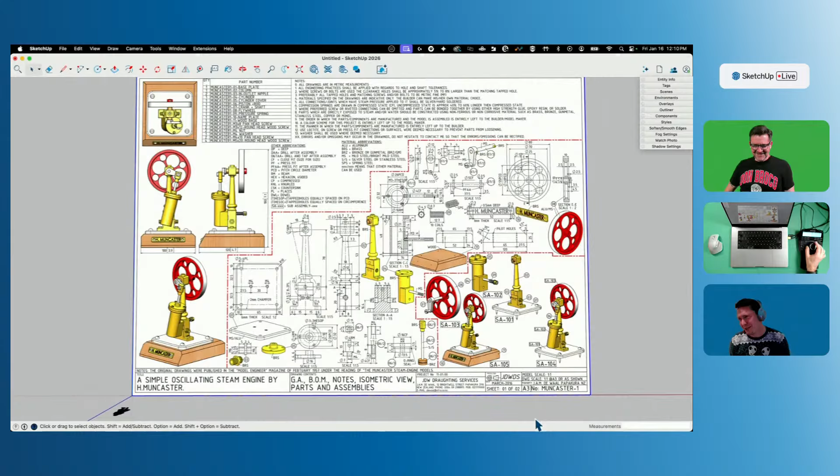Classic. Yeah, so this is the plan.

So the reason I picked this, like I said, there are a lot of these, all different style steam engines. I didn't know there were so many different ways to push steam into a piston to create movement, but I'm not kidding when I say dozens of these. Non-professional Dave can actually comment on how many he's made. I want to give him credit, though I can't remember if he built one first on the forum or if I did one first live, but we did some back and forth sharing these files for sure.

You say built, you've actually built one of these in SketchUp? Well, I have not actually made this in real life. I don't have metal machining abilities. I tried 3D printing one of these once, and the tolerances on 3D printing aren't good enough for this. Two pieces of metal can slide together fine, but two pieces of 3D print go like this instead.

So it doesn't work. The main reason I picked this one is because it has 11 pieces plus a couple screws and nuts, so we can get through this fairly simply. If we spend 10 minutes per piece, that's 100 minutes, so 110 minutes total. We should be able to do this.

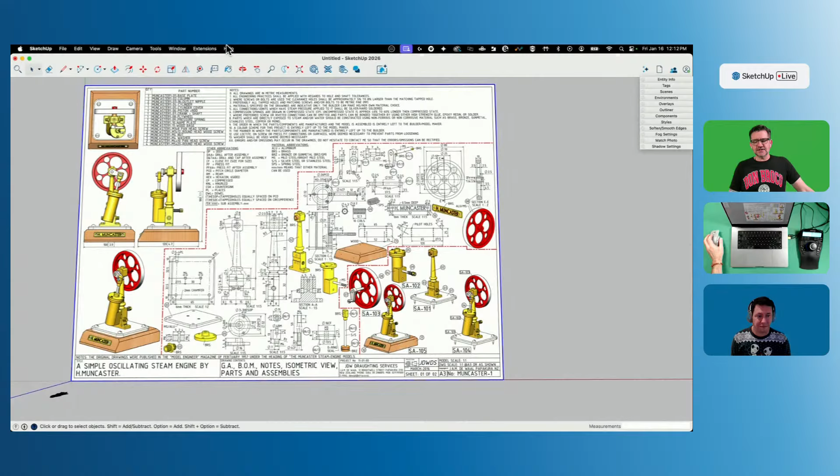When I model, SketchUp is limited. SketchUp was created to model architectural size things, house size things, office buildings, that kind of stuff. So when it comes to modeling really, really small faces, sometimes it can fall a little short. We're talking fractions of inches or fractions of millimeters. But to keep everything the same, so everything renders correctly and the geometry builds correctly, we're going to build these millimeters as if they were meters.

So we're actually going to scale this up by, was that 100 times? We're going to model all this stuff in millimeters. It'd be 1,000 times, right? 1,000 times, yeah. Okay, 0.001. Okay, so we're going to model in meters.

So the first thing I'm going to do before I go any further is go into model info. I'm going to click on units, change to decimal units, and then set it to meters. I'm not really concerned about area or volume, I'm not going to be pulling any information like that. Really all I need is my length to be input in meters by default.

All right, what we're going to do, I really want to visualize this with current materials on it. I think it's going to look really cool with some brass on there and that kind of stuff. But for the time being, I'm just going to model it without worrying about that right now, for two reasons. One, I get caught up in it and forget to continue modeling, start playing with materials. The other is if we're modeling 1,000 times bigger than the actual material, we can get some weird looking materials. It looks really good on a face this big, but shrink that same material down to about this big and it ends up looking tiled and weird. So right now I'm just going to put in basic materials, everything white. We'll make tags for everything as we go, and when I'm done, I'll scale it to the proper size, put materials on it, and look at it with all the rendering and stuff. It'll be fun.

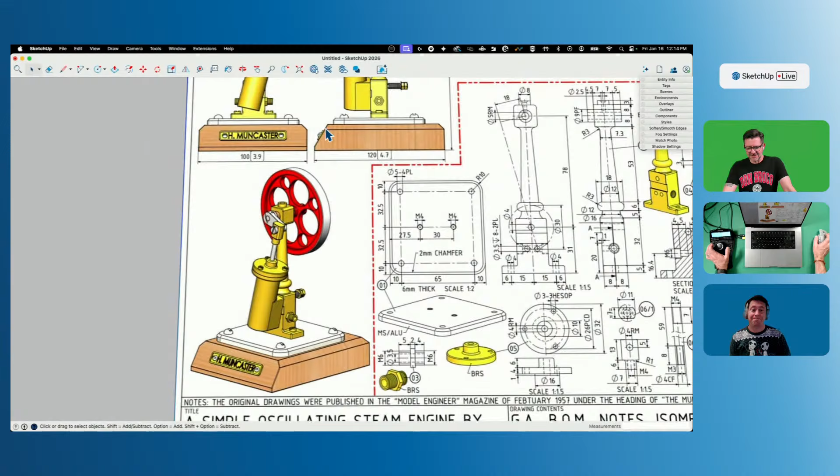I'm going to model most of this stuff using just native tools. The one extension I'm going to use is Bevel, to put some of these bevels on here—not this one I'm pointing to, but anything that's rounded off. It's just much quicker to use Bevel than to go in and do Follow Me's.

All right, let's start with piece number 1, which is this plate right here. This plate starts with math: 65, 75, 85... square. So 85 by 85.

I'm going to start on a rectangle, 85, 85. Because meters is the default unit, I don't have to type in a unit to measure in, and it'll give me an 85 by 85, which is very, very big. So I'm going to scale my instructions up so that's close to what I see here. There we go.

Now I want to turn this into this. When I look at this, it's a flat plate with the angles cut off at a 45, it looks like. It's got 1, 2, 3, 4... 6 holes in it and rounded corners. I'm going to do the rounded corners and the holes while it's one flat piece, then extrude it up and do the chamfer thing around the outside.

I usually put rounded corners on last. The reason is it's easier to pull off the edge when I have a corner right here, as opposed to having to come back at the back of an arc to pull a dimension.

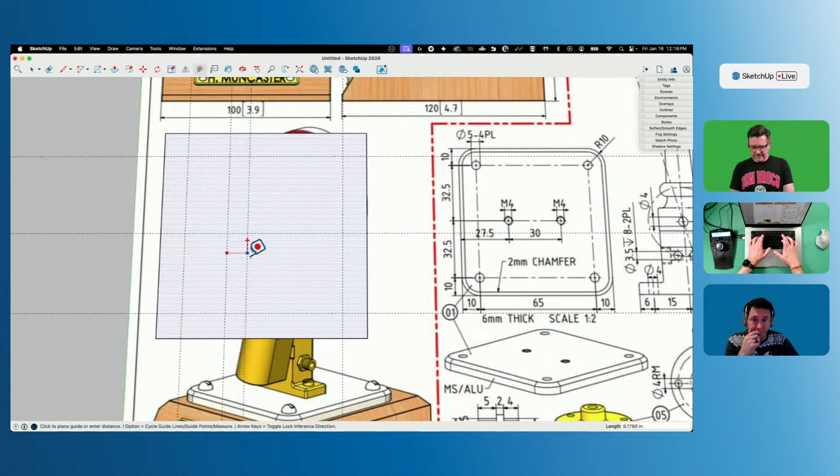For the chat: give me, if you will, the measurement I need to put in for an M4 screw hole. I believe it's a screw hole, not a through hole. So give me what an M4 should be in millimeters.

While you do that, I am going to put these in here, which...

Dave says, 'guides? I just fell off my chair.' It's a new year, man. New year, 5-4—oh, 4 of them. Transom just picked himself off the floor.

M4 equals 2 millimeter diameter—2 millimeters, okay wait, no. Somebody says 4 millimeters, nope. 2 millimeter, 2 millimeter radius—yes, not diameter, radius. No, 2 millimeter is a 4. Nope. Now Dave is saying M4 drill tap is 3.3 millimeters. We've got numbers all over the place—4 millimeters, 3.3 millimeters. I believe 3.3 is it. We're going to go with 3.3. Okay, I wrote it down in ink on a piece of paper. We've got to use it.

Okay, I got those in so I can get rid of some of these guides. Whoops, too much. I do delete my guides as I go—I don't like a bunch of guides in my way. So I'm going to keep my outside ones here.

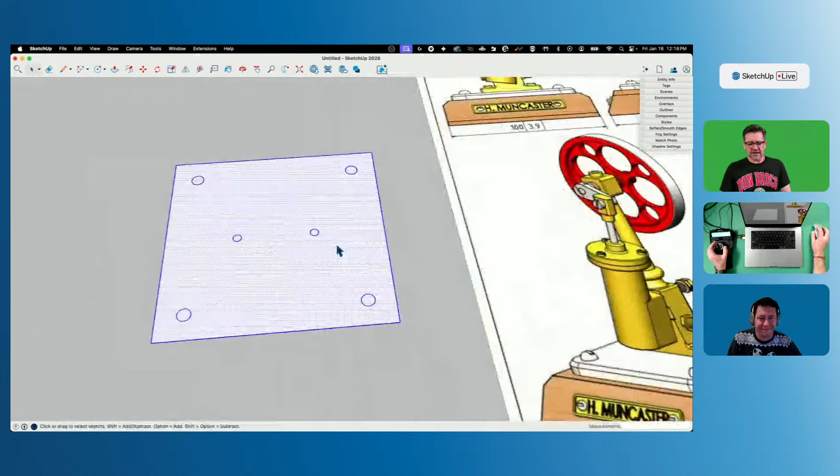Now here's the thing that happens sometimes, so I'm going to explain it—explaining this is going to take longer than the time saving that's actually going to come from doing this. The reason I'm doing this now is so when I pull this up, the holes will already be there. If I waited, if I pulled first then drew the circles on top, I'd have to pull each of them down, which isn't so bad with 6, but imagine there were like 150 holes here.

One of the other things that happens when you do this is now I have to go through pick and delete, pick and delete, repeatedly. That's how long it would take to get rid of those faces. With 6 it's not terrible, but imagine this was a shower drain with 99 holes. So I've started playing with select and deselect tools. If I select inside the square, I can get all of those selected. If I hit delete right now, they'll all go away, but I don't want that. Instead, if I select all of these, right click and say select only faces, I can quickly get rid of that. Now this is ready to pull in.

Wow, so something to try - there are some select filters. Some of them I have are selection toys, but there's a native filter as well for selecting and deselecting specific items.

I need to put a 10-meter radius here, so I'm going to draw a line back 10, then grab an arc, go from here to here, double click, double click, double click, and get rid of that. That is now ready to be pulled to depth, 6 millimeters thick, and pull it up 6.

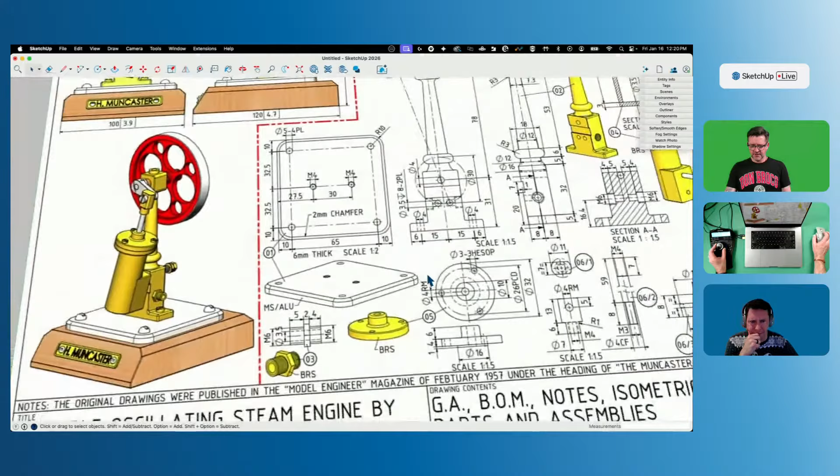Now one last piece here is this little 45 right here. If we have a dimension anywhere, how do you know it's a 45? Just based on this rendering, it looks like it's not rounded over. Does it say 45 anywhere? No, okay, but I'm totally assuming. Oh, here we go, this is perfect, see look at that, it's definitely not rounded over. So what I don't have here is a dimension to it. Oh, there it is, 2 millimeter chamfer.

So what I'm going to do is double click, then F for offset, pull this in 2. Beauty. Now what I need to do is get the outside and push it down.

This is kind of a bummer because this is not going to be easy - I'd have to go select all 8 pieces. Instead of doing that, I'm going to undo a couple times and go back to flat. I'll double click, right click, weld edges, and that should give me one piece all the way around. Now when I push this up, a couple things happen - when I go up 6, I don't get the little edges at the end of the arcs that I saw before.

The other thing is this is all one piece, so when I offset this 2, I can grab this with a move and drop it down vertically 2, and there we go, that piece is done. That piece is cut out of, looks like aluminum. Yes, so here's what I'm going to do.

I'm going to triple click, make this a component. I want to make it a component because I want to give it a name. The name is going to be 01 base plate. And I want to assign a material.

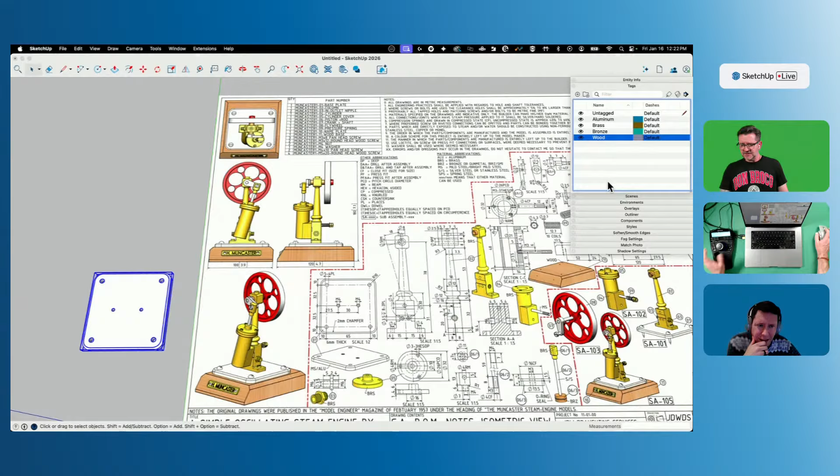Would the red thing be like cast iron or something like that? Or I think the red is just - I believe this piece 7 is actually cut out of aluminum, just painted red. So we'll have to decide if we want to paint it red or just shiny aluminum. Of course shiny is going to look good when we do materials.

Fair enough. So one thing I'm going to do is color everything on the layers by tags. To do that, I'm going to change my default color. So for aluminum, we'll change that over here, grab just a default color of like a light silver. Brass, we'll use like a yellow. Bronze, we'll use an orange.

And then for wood, we'll just grab a brown.

All right, then what I can do is take this piece right here. We're going to apply that from the untagged. We're just going to say that is going to be made out of aluminum. And then the other thing I want to do is, I forget how to color by tag.

Hold up, that button? There it is. Color by tag. So we won't get our full shiny reflective material with material mats or reflection maps or anything like that, but we will get a color indicating what it's going to be. Like I said, once I scale it, then I'll put the proper piece on there.

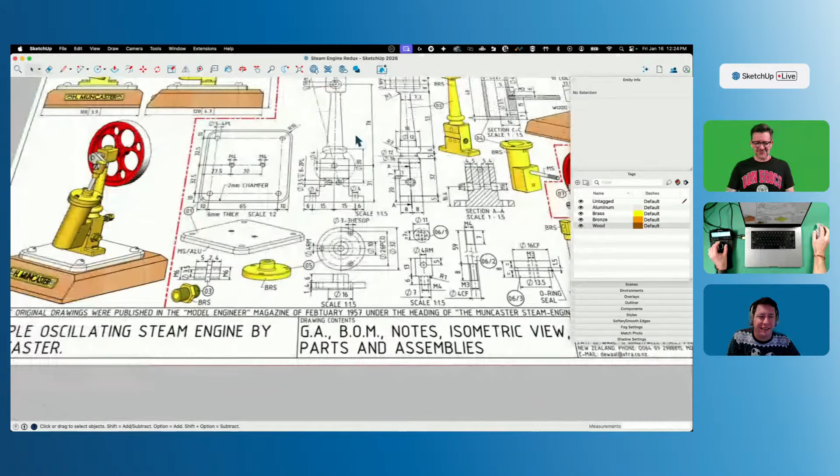I said that like there have been, I just read that right here. Yeah, there have been comments that there is a whole lot of text on these plans. There's lots of words. I generally, when something like this, the most important thing to do first is ignore all this and look for pictures. So that's exactly what I did.

All right, moving on. We have this big old brass piece, and it's 2 main pieces. So down here we have like the base of it, and then we have this kind of spindle with a block at the top. So I guess 3 pieces, 1, 2, 3.

So let's start, let's just build up. So we'll start with the bottom section. Here we have a beautiful section right through the middle. This is going to make it very easy.

The tricky thing too about these drawings is, like I said, if you go look for them, you will see a bunch of them, and 95% of dimensions are great. Every once in a while, it makes you work for a dimension though. So that could happen. So let's draw this thing.

Dave is reminding that it's now a good time to save. Save, right. So 30 plus 12 is 42.

So this is 42 wide. This little foot thing comes up 5. Comes over an amount that I don't know. All right, that's cool, I'm just going to go ahead and create this rectangle.

This is the base right here. And then from there, let's see, it goes up to here. So that's 32 above the 5. So it could come here and type 32. That gets me trying to show this and also,

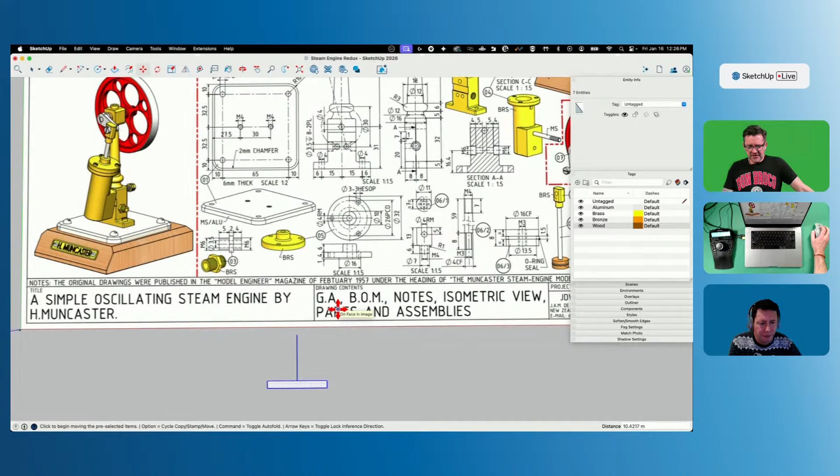Jason said, is there a database to download different technical drawings for bigger assemblies of these? I don't know, I think these used to be on a website. I don't know if they still are anymore. Dave may actually, if Dave is still here, he may know if the database is still there or not. I don't remember, or I didn't go look at it. I just grabbed this simple one.

Let's see here, where are we at? So that 32 is to right here. Trying to find a width of this overall piece. Not seeing a whole lot. Let me look at something.

Gusbert saying those M6 holes are 5mm diameter before tapping. M6 is 5. All right, perfect.

Okay, so it's not the same width as that block at the top. Keep looking, keep looking, keep looking. 18, not the same. Oh, right here, 8 and 8. That's what we call 16.

All right, so I'm going to go this way, 8, come down. Go this way, 8, come down. That doesn't look right at all. 16. That's the width the other way.

Which is good to know. I had to pull that up 8 at some point, but this piece right here is wider than that. Oh, it really doesn't say, does it?

It does, and this is what I was saying. This becomes the challenge of these models in particular. It's not always everything you need is right where you need it. Sometimes you gotta look around, or it'll inference hole locations from another entity or something like that.

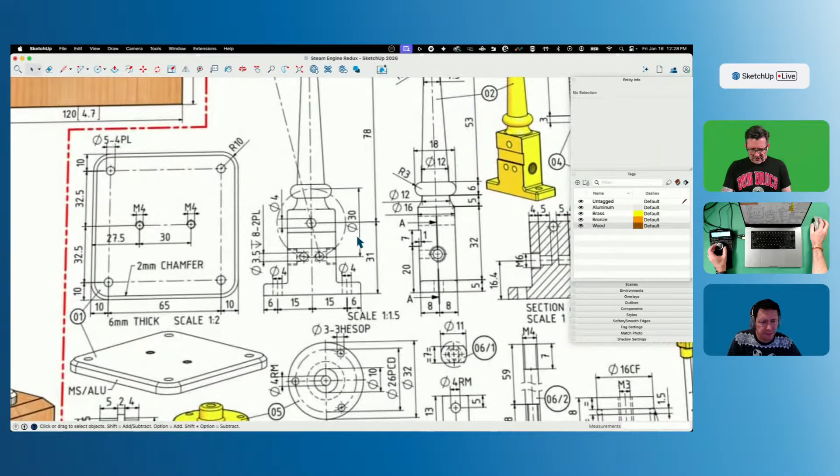So we got 15 to the middle to this screw hole, which is good to know. But 15 here, so it comes over this way, 6, and then it goes back in here some additional amount, another 4, so leaves this at

22, maybe. Let's see what this looks like if I go from here over 11. All right, so that's a total of 22. Over here we got 10 and 10.

That seems right, that's what I'm going with because I don't have any better number. So let's take a look at that section to the right. Yeah, it shows the height of the holes, it shows where the middle hole is, and it shows the depth of the holes on the side, but it leaves me guessing right here at the middle.

So it's 9 plus 9, which is 18, plus slightly smaller than whatever this hole is, so 9 from 9 is 18 is 22. So actually, if that lined up perfectly, then that would be 22. We're going with it, nobody talk about that ever again. I'm not going back, I'm not changing it, we're moving on. This is 16 deep.

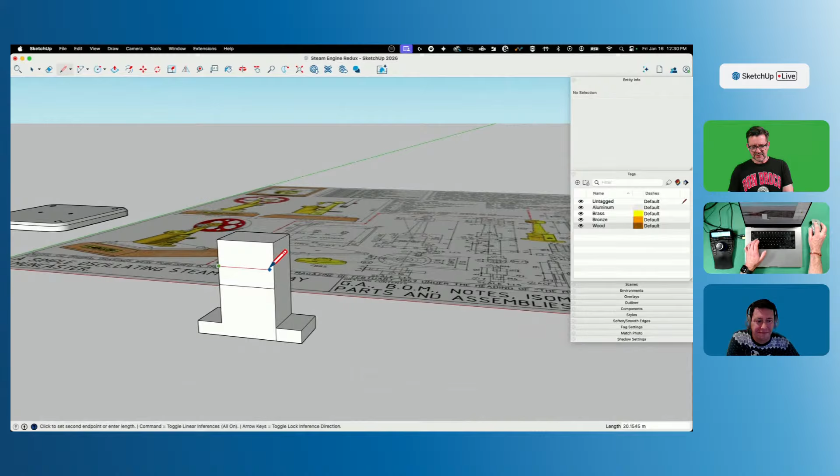So last time it took 3 hours, 4 hours. How long did it take? But I don't remember, you'd have to go look. It was 3 years ago, but I don't remember exactly what the time was, just because we jumped around for a little while there with how long a stream was okay to be.

So this is a 1 millimeter inset, so I'm just going to put in 1.

We got some people that just joined wanting to know, what are you doing? This. Probably not good enough - we are modeling a scale steam engine, so we're modeling each of the pieces. We've got 1 done so far. Also talked a lot. So, all right, I'm gonna finish throwing some holes in here.

So on the side here, I have an M6, which is an untapped hole of 5 millimeters, 16.4 off the ground. So if I come right here, let's do this - I'm not sure how to do that, I'll just start right here, in from straight down, 16.4, enter. And that is right there, 16.4.

I'm just gonna draw an edge across like that. The reason is I could have pulled a guide up from here and just subtracted 5 off of it - I could have done that math, but I didn't. All right, and then a hole of 5 right here.

So I'm gonna go to the middle, 2.5. Get rid of that, get rid of that, get rid of that. And then I'm gonna take that and mirror it. I'm gonna be doing this a lot across here to the other side so that I have a hole on both sides. Now, this hole goes in 4, then it shrinks down to a smaller hole on the inside.

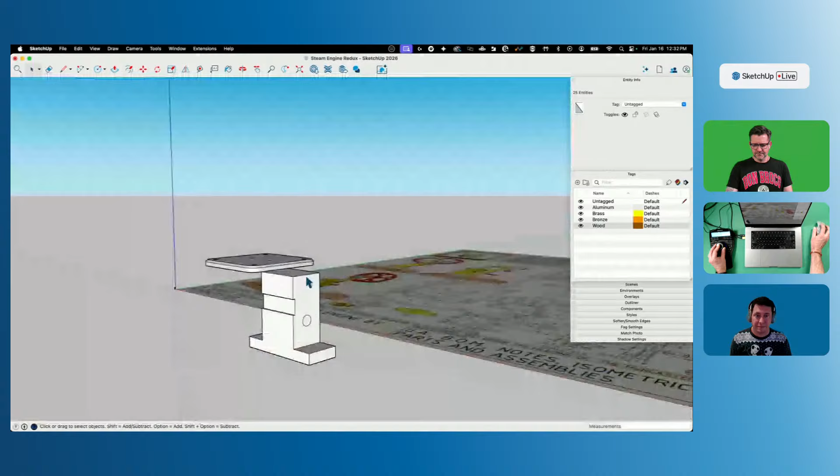And I'm just wondering, there's my 3.5. So I'm going to push that in 4. 4, enter, double click over here, and I'll zoom in here. I'll draw a new circle. At the center, half of 3.5 is 1.75, enter. I'll do the same thing.

I'll grab that, mirror it, a copy of it to the middle here. Then we should have one over here. Perfect. Then that hole goes in 5. So we'll push that, 5, and then I'll come around this side, double click. If we hit X, we should be able to see those two meeting.

I'm gonna save that because that's how I'm gonna celebrate. Anytime we do something right, I'm gonna hit save to celebrate.

Yeah, save to celebrate. Colin says the steam engine from 2 years ago was 2 hours and 15 minutes. The older steam engine model 6 years ago, for example, were longer, about 3 hours and 50 minutes. Which model was that? Was that this one, Colin?

All right, here I have 3.5 millimeter holes also. It looks like they line up right with the ends of this, so I know that's 9 in. So what I'm gonna do is create some guides.

No one expected me to do that. You're just gonna throw everybody off. All these guides, right, Aaron using all these guides. Pull a guide up to new year, new Aaron.

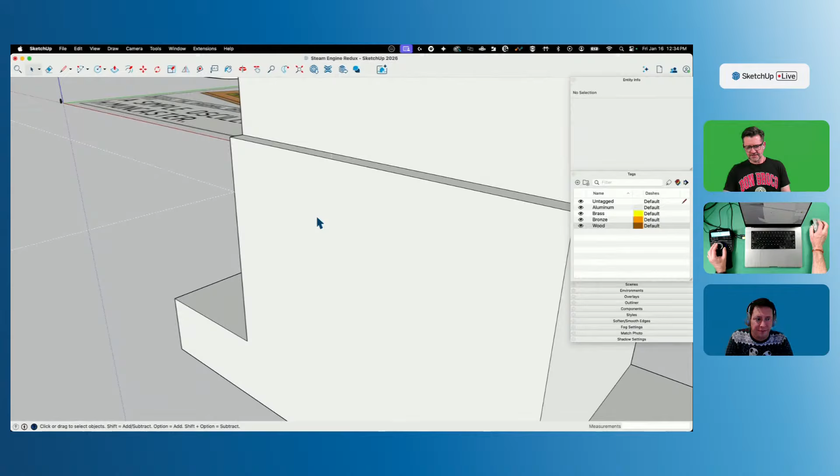I'm going to draw a line from here, 1.75, and then draw a circle from there back to here. That's going to give me my 3.5-inch circle. Get rid of these guides.

Take that again, some more mirroring, just using the center point here. There's both of them. Now when I push this in, I'm not sure how clean this is going to be. Let's see—yeah, that's not going to be ideal.

I don't love that, so instead I'm going to grab both these circles and make a group out of them. Now when I go into that group, I can push-pull this and just kind of infer where the back of that inside circle is. We'll do the same to this one.

So what I just created—if I come in here, look, component edit, hide the rest of my model—I just created these two cylinders, right? But they're a solid group. If I triple click this, make it a group, also solid, I can take this one and say tools, subtract that from this one, and then I should get my two overlapping holes.

There we go. All right, so that gives me these two holes going into this, and then the only other thing I have is one hole that goes straight through, all the way through, right there.

That is right here, which is 30 up from the—or wait, no, wait, what? 31 up. Wait, what? I did something else wrong. Maybe 31 off the bottom. Let's try it, let's see.

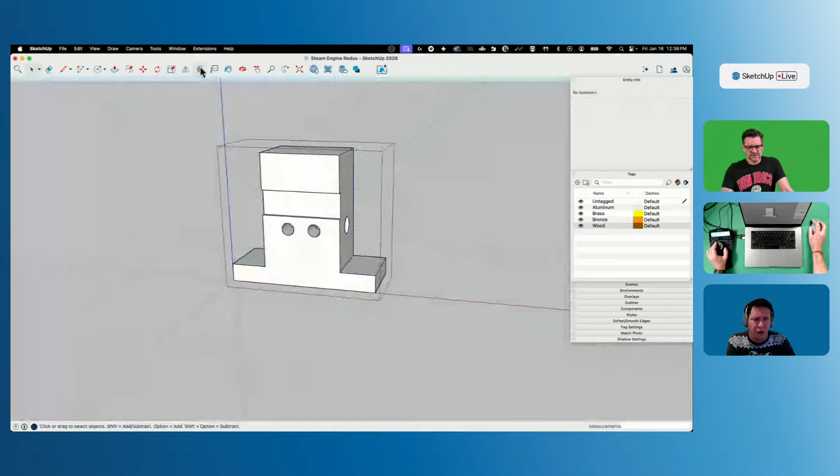Relly on LinkedIn says you can convert that PDF file in AutoCAD, rescale it, and then save it. Then you can import it into SketchUp, and with that you can easily create the models faster. So that is a theory.

Here's my one argument to that: using these lines as correct is an assumption. So if I were doing this for any kind of production where I had to be perfect, I would end up double checking almost everything to make sure it was right, which I don't know would be quicker. I honestly don't know.

Because that also depends on what you're used to, right? Yeah, yeah.

But yeah, if you can get a vector-based drawing of things that you can then import, that's definitely a nice way to go if you know you can trust it. That is a smart way to do it if you can, for sure.

Absolutely. All right, I'm going to try to draw this one over here. I'm going to draw a little line of 8, and then come up here—come up 5. I'll draw a little line across like that just to reference where that is. I'm going to come up 6, same thing, draw a little line across. I'm just drawing this profile over here.

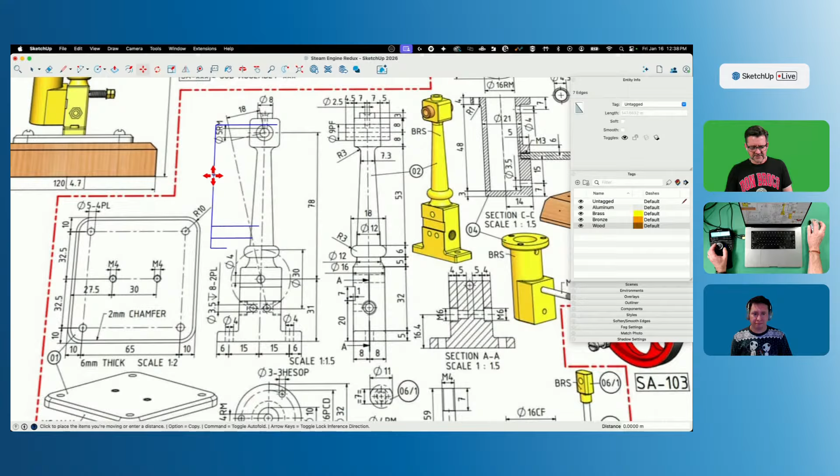Where can I stick this? That'll work okay. All right, now I can see that—okay, so first thing that happens is this is 8, that's my width there. And that's going to come into 12, so that's 6. I'm going to come over this way, 6.

And then from 6, I'm going to draw an arc that goes from here to here. I'm going to be a little artsy with this—this is not structural, so I'm going to do that.

All right, then here this line goes out to 18, half of which is 9. I'm drawing half of the profile of this shape. So that's right there. Now that has a half circle on it.

So I'm going to draw a circle right here. I'm going to chop it in half. I'm going to take this half and move it to right here, get rid of the stuff on the inside. That gives me that.

Now I come over here, 6, which is half of 12, which is the base here. That's going to go to here. And I'm going to temporarily just draw it straight up like that.

And then at some point it has a neck width of 7.3 somewhere, so I'm going to say that's here. Half of 7.3 is 3.5... 3.65.

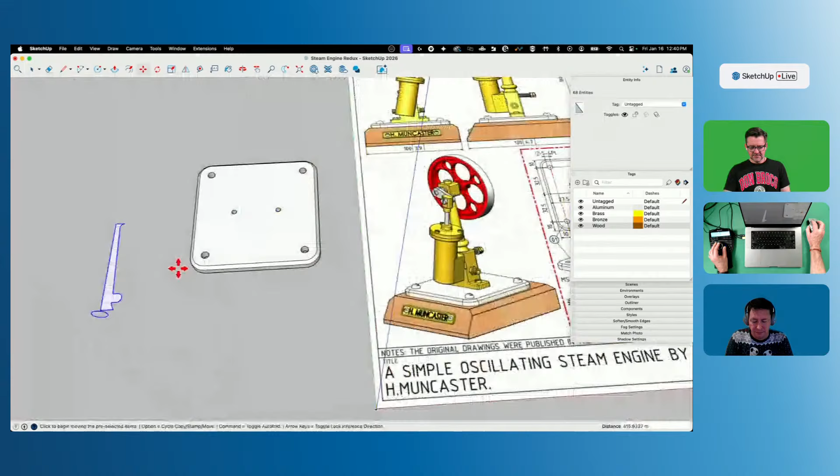All right, so I'm going to grab all of this and all of this and just slide over here so I can see exactly what happens now. I'm going to take this round piece and say, follow me with this piece. I'm going to get that.

All right, I'm going to grab that, temporarily group it, turn it upright. And now I need to put it, grab by that front piece, come right here, drop that right in the middle. That should line up front and back. Perfect, all right, there we go.

That's that piece. Moving on, we have one more, a square piece right here.

This is where I'm like, come on man, just give me a number. Why can't you just give me a number? So I know how high it is. I know it's 8 high, or 16 high, but I don't have a measurement this way. I'm going to assume that it's a square, so let's do a rectangle 16 by 16.

Yeah, looks pretty close. Wow, yeah, that is pretty close. And then we'll round the corners off at an unknown amount. Maybe 2, let's try 2, let's see how 2 looks. 2, arc, here down to here, get that magenta-y. There we go.

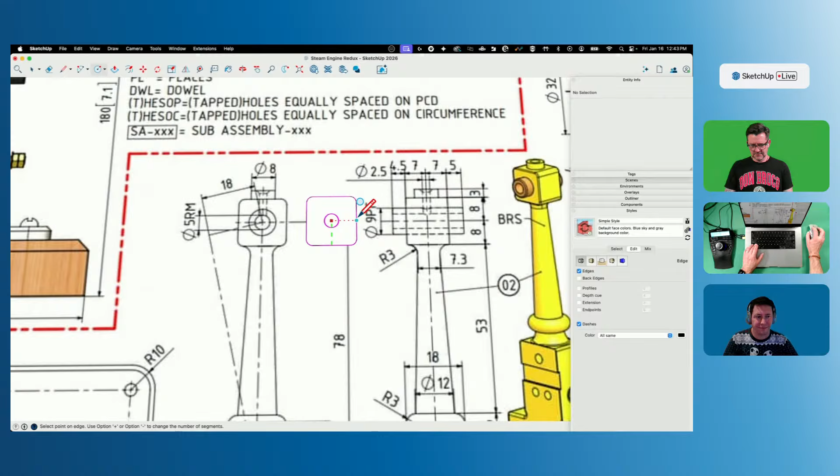Yep, all right, so I got to put a hole in there of 9. So I'm going to go to the center, inference up here, inference here, pull those two together. And then 4.5 for radius.

I'll cut that out, delete, and then make that whole thing 7 plus 7 is 14. Oop, I'm gonna weld again. 14. And then...

Got a hole in the top. The hole in the top is 2.5. All right, it's also in the middle, so I'm just going to draw a line right here, inference the middle. Right here, half of 2.5 is 1.25. Erase that, erase that. Whoa, that got kind of weird.

All right, we're good. I'm not going to do a bunch of intersecting like I did before. Instead, I'm just going to run that circle through from the top, grab all of this, right click, intersect face with model, and then I'll just erase this piece off the bottom and delete that. That gives me a hole.

Now I need to make this little—I don't know, we call it a nipple or what—but it does pop up there, outer of 8. So I'm going to go another circle. Oops. Circle, inference over the edge here, go to the middle. And then we can just—whoa.

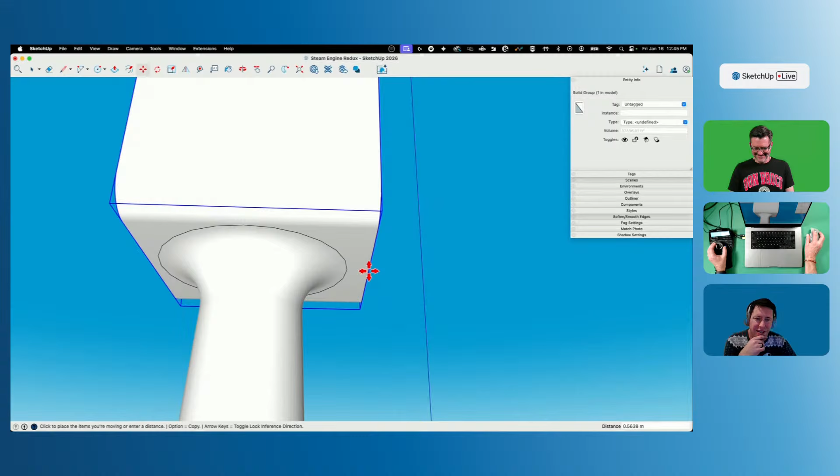Too true, too true. Especially if you're up on the 3rd or 4th floor or working on the roof, don't step back to admire stuff. I promise you that won't go well.

So then we have a tube here that comes out 4.5 on the side with a divot and 5 on the other side. The inside hole of that is... what the heck is this? I don't know what that is.

Inside is 5. So I'm gonna put a circle right here, inferencing off of this circle. I'll hover right here, go to the middle. Oh, maybe I don't have the middle here, from the back maybe? This is a push-pull, so I might not have a good circle to inference off. I'm gonna draw a line across here, put a circle. Oh, it's inside the group, that's probably why. There we go.

And then draw another one of 2.5, that gives me my 5. I'm gonna take that through to here, that's gonna come out another 5 on the back. Let's come out the front, 4.5.

And then I'm gonna triple click and make that a new group. Now I have this solid group and this solid group. I'm gonna grab all 3 of those, go to tools, and just outer shell that whole thing.

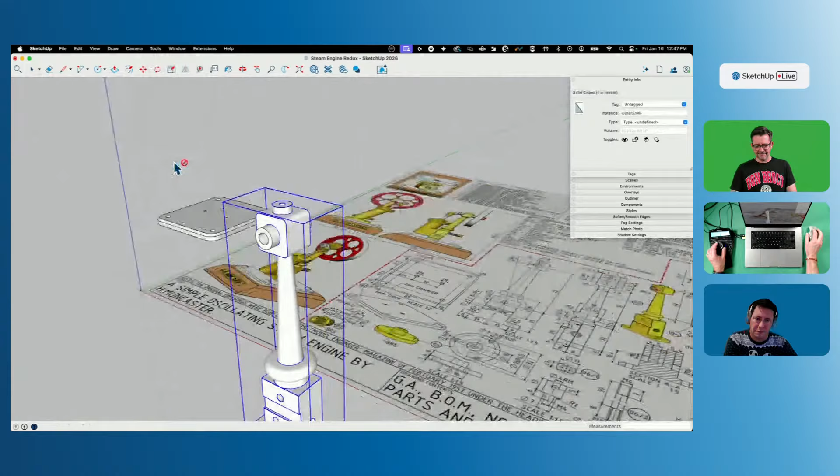Bam, that's that. Then I'm gonna grab that piece plus this piece and put that all into a separate component. Before I do that though, I'm gonna grab this piece because it's a different material - this is actually bronze - and assign it to the bronze tag first. So that should change color. There we go. Now I'm gonna grab both of these.

I'm gonna say make component, and this is 02 dash - what is the name of this thing? Column.

Dave says that is a guide to show where those 2 holes need to be to admit and exhaust steam. Did I read that right? I see, so that is a guide to show where the 2 holes need to be to admit and exhaust steam. Okay, right. Would that be this angle right here, the maximum angle?

Oh yeah, that must be what he's referring to, because that is tied off of this point right here. Kiggy says you need holes in the base plate of that piece. Right, you are. So I need some 4mm holes, 6 in. Fortunately, you can still do that.

So I'm gonna come right here - oh, gotta double click because I am in too deep. I'm gonna come this way, 6, draw a circle, 2. I'm gonna say copy that. Oops. Copy the midpoint, there we go. And I'll just pull those down, double click. Cool.

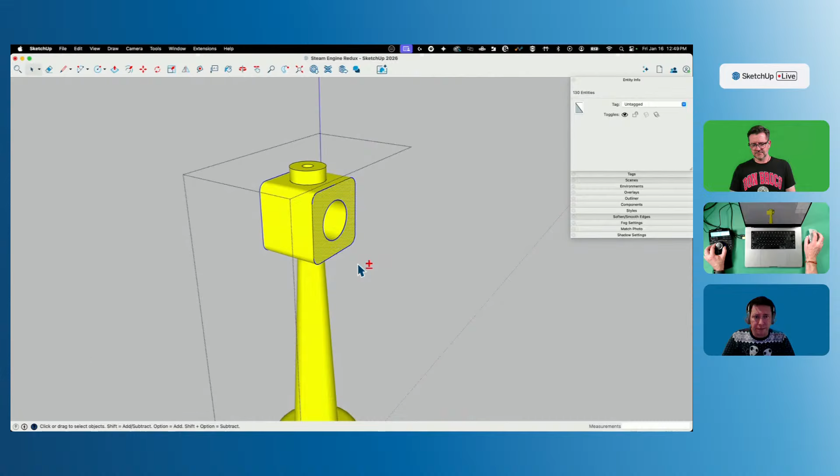Alright, so we do have a little bit of beveling happening on here. If I come into this one and grab this, that broke in a weird way. And this, even weirder break. What the heck? Okay, let's do this. Still didn't - oh right, grab that, grab that, and then I'm going to deselect.

Whoops. You okay? If I double click that, double click that, and then I deselect that, and deselect that, and double deselect the inside, now I have just those 2 outside edges. While they're highlighted, I might as well just go say weld edges. And then I can come into extension and bevel that.

I'm just going to put a 1. Let's do like a 0.5 with 3 segments. 0.5 comma 3, there we go. That's what I want. When you say 3 segments, what do you mean by 3 segments?

So if I look at my geometry here, my keyboard shortcut for show geometry is not working. Well, it only gave me 2 - must be too small. It was supposed to be 0.5 with a 3 segment arc right here, but okay, that'll still work. That same thing is on everything here down, and then these 2 up here. So I can come in here, select that, select this, this, and this. Come on, there we go.

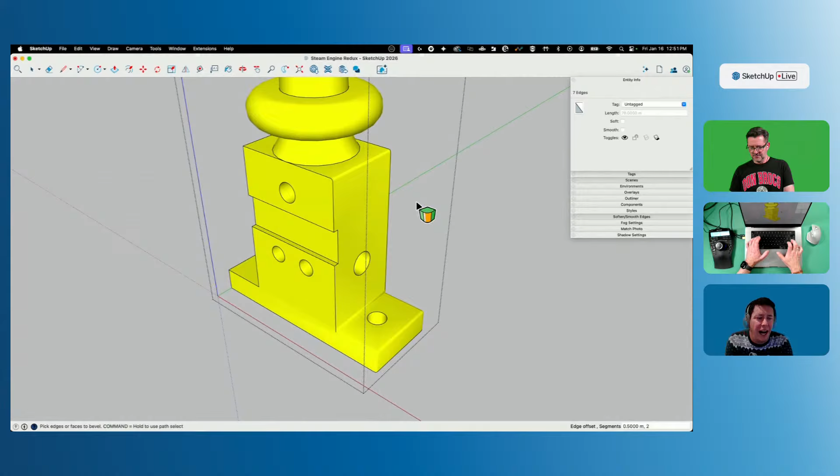People are talking about your space mouse, saying they love how smooth it navigates. I've heard it takes a while to learn how to use it, and I can attest to that, because the first time I tried to learn how to use a space mouse, I almost threw it across the room because it was so frustrating. But if you're used to it, yeah, it does make orbiting look spectacular.

All right, now I'm going to jump ahead a little bit, and I'm just going to slap this down where it goes on the base plate. So I'm going to grab this by the center of this circle right here, and place that right over... there we are. Over the center of this circle right here.

Why are they different diameters? Because this hole is one my screw should go freely through, and then this one should be threaded. So this is a through hole. Somebody who's smarter than me, tell me what the names of these holes are. So this will be threaded, and then the screw will just go through this. The head will grab this and pull it down tight into the thread there. So this piece won't be threaded.

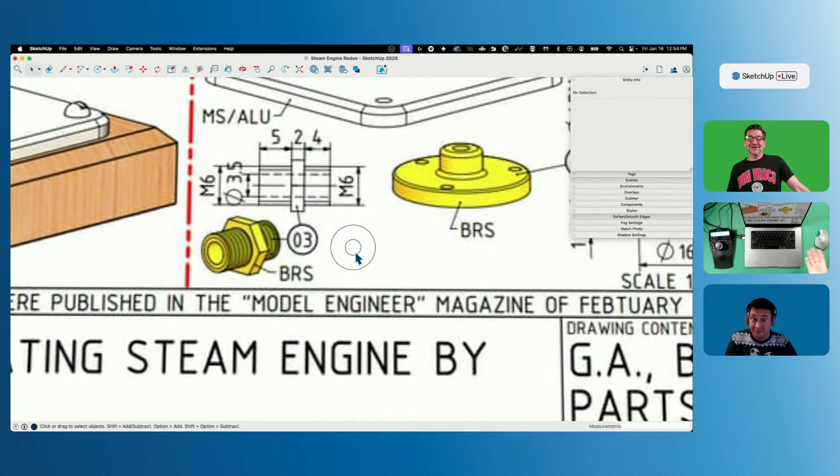I'm just going to draw this. We said an M6 is 5, so I'm going to make that 5, and then it has a 3.5 hole in the middle. So I'm going to say 1.75, which is half of 3.5. I should point out I'm not doing that math myself. I'm not good at math, but 3.5 happens to be a 2x4, and I know the center point of a 2x4 is 1.75 inches. So I don't want to disillusion anybody. All right, so we'll make that whole thing 5 plus 4 is 9 plus 2 is 11. So I'm going to come to 11. That didn't seem right. There we go.

And then separate from that, we are going to draw this, which I have no dimension for. So, slightly bigger, so I'm close. This is saying it's about 11. Let's see, if I go to my polygon, draw a 6-sided polygon, I'll inference right off the middle here, and start pulling it out to see where 11 would be 5.5. That's not big enough, maybe 6.5, no, we probably should go out all the way to 7. There we go. And then I will push that down to 7, and drop this down another 5.

That gives us this. So now I'm going to make that into a new component, which is 03, which is, of course, an outlet nipple, in-dash outlet.

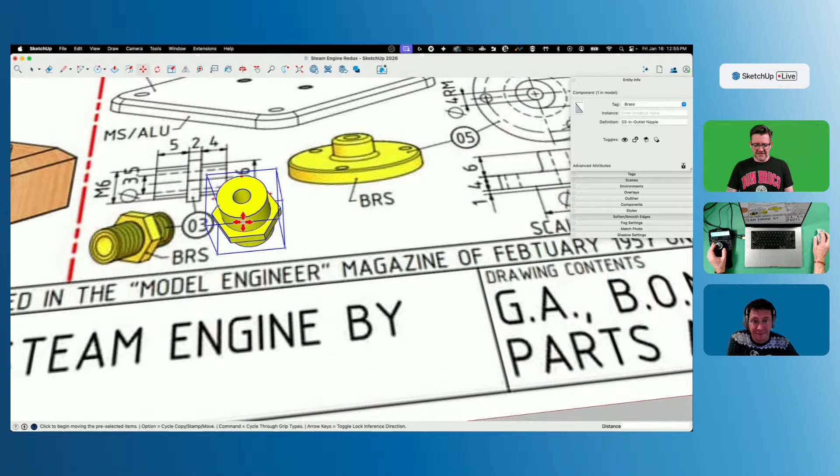I'm suddenly craving In-N-Out burger for dinner. I'm not sure what that's about, but it's correlation causation. Oh man, they just opened. I'm going to just talk while I do some things here. But they did just open an In-N-Out in the town where I live, and we were able to get past the initial rush where it was impossible to get in there. And I'm not from California, so this isn't an in-my-blood thing where I'm okay standing in line for it.

That's not right. Is it supposed to fit in that space? Yeah, can you scale it? I made that 10, it's supposed to be 5. Jeez, good job, jerk. Okay, let's try that again. No, instead of undoing everything, can you just scale it by half and it would work?

No, well, here's the problem. My inside hole's correct and my length is correct. So I think the easiest thing to do, since this was drawn by eye based on this outside dimension, I'm going to delete all, just get rid of that. I'm just going to push this through to here, gets rid of that face. Snap, and then I'll just get rid of these extra lines now. And I'm just going to come in here. Wow, something was real off there. All right, then we'll draw that across.

2.5. That's probably what that should look like. All right, let's try, we'll get that. Questis says the missing dimension for that object can be found on the other view of the whole drawing, probably about 10 millimeters.

All right, so this was, I forgot, it was 4 on one side and 5 on the other, I think. Oops, I lost my face here. So patch that up right quick. 2 edges. Oops, that one missed. 2 edges, hear that.

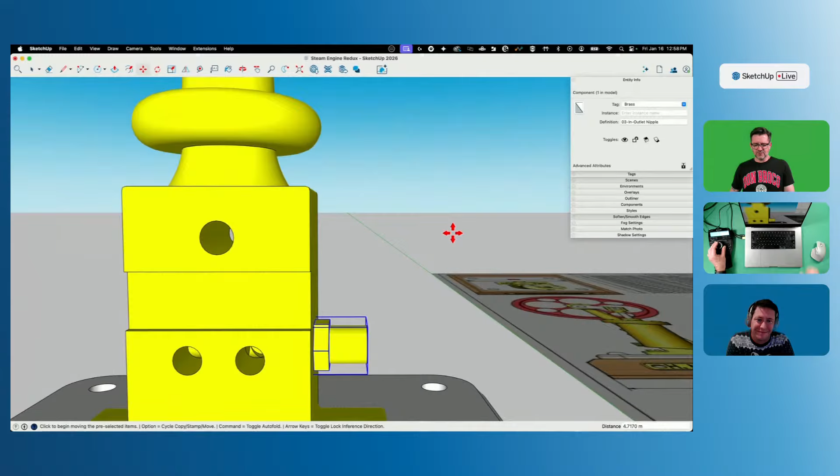Yeah, so In-N-Out, we just moved to Utah not too long ago, and In-N-Out is huge here, super popular. If you want to go, you are waiting in line for 30 to 45 minutes. See, the first time I went there, it was like just opened up, so yeah, we'll wait in line, whatever. It's fun, it's part of the experience. Fortunately, fairly quickly it got to the point where it's like a normal fast food restaurant now, which is good. I think it's good food, but I don't think it's like wait in a line for 30, 40 minutes. But the thing that also impressed me is there had to be like 30 people working behind the counters when we went in. I know a lot of that's training, but I'm like, there's a lot of people here. But yeah, decent food, I like it. I like it, all right.

Next, we're doing this. For those who aren't in the U.S., which seems to be most of our audience today, In-N-Out is a burger joint, so hamburgers. They notoriously have a very simple menu, it's only like four things, and that's it. Which is kind of the nice thing about going there, and it's the nice thing about working there apparently, is you don't have to master a whole lot of things to be good at working there.

Wait a minute, I got some differing dimensions here. Oh, no I don't, this is all right. So what we got here is a rectangle, we got this shape right here, but I did it wrong. This shape should be 10.5, 20, 21.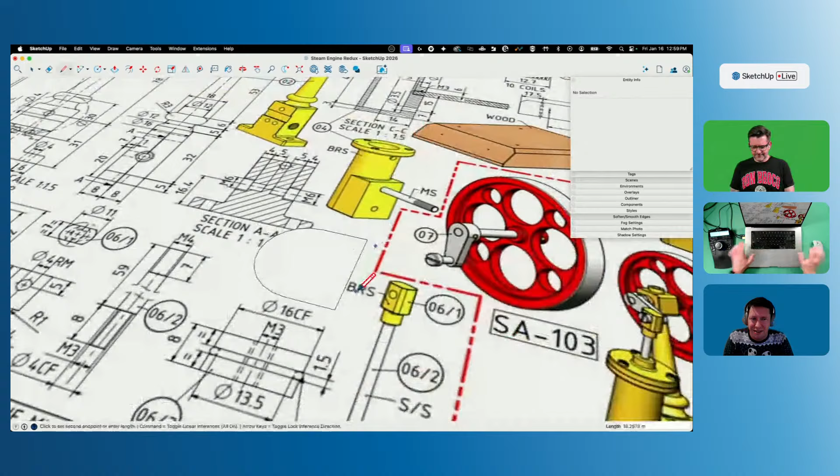Lance says, don't forget about the secret menu items. That's right, I've heard about the secret menu items. I've never done it, I've only been there like twice in my life. So it's like the animal style, getting the onions and extra sauce on stuff and that kind of thing. But it's not very secret, it's actually, I think now it's actually listed on their website too. So for a while there, you had to know somebody to ask what to order, but now, yeah, it's not as tricky anymore. But like I said, it's a good burger.

All of this is because one of those pieces was called in/outlet, by the way, to remind everybody. All right, banter, Aaron banter.

All right, so I come here, draw a circle 8, and then this piece rises up to here, which is, why would you make that simple? 15 plus 6 plus 7. 6 plus 7 is 13, plus 15 is 28.

Questus says in 2001, when Krispy Kreme expanded into Ontario, the wait time for the drive-thru was 1 to 2 hours, with police constables guiding traffic through the area. That is crazy. No, I'm not. I like Krispy Kreme, I like donuts in general, but I've never liked a donut for hours of sitting. That's too much for me.

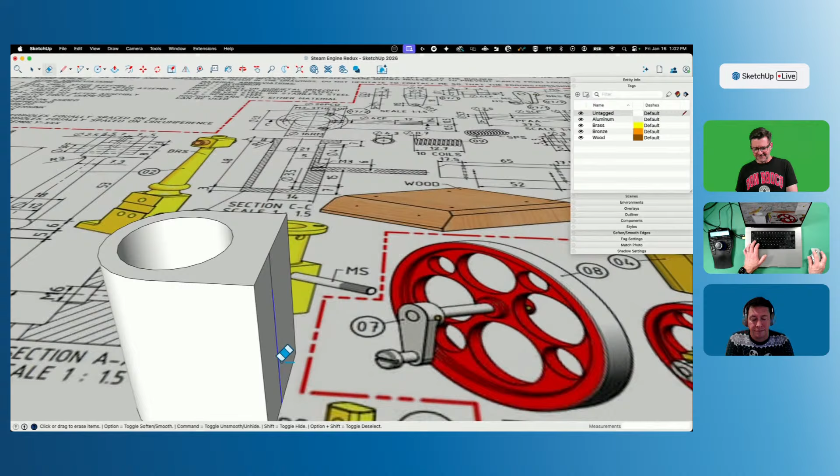Okay, so I think I got this 6, 15, and 7. I just drew a line down 6, and I drew another line down 15, and then I measured that was 7 to the bottom, so that's correct. All right, there we go. So that's that much, and then it returns to just being a circle for the rest of its travel up here. So I'm going to grab another circle.

I don't know the purpose of these plans really, but if the missing dimensions are intentional because this is a learning thing, or if this is just how machine plans are sometimes, instead of saying from here to here is this much, we have to go back down to figure out where that is, and that is up 48. I'm assuming that's a design choice and not a standard way of drafting. Yeah, I don't know.

Just keep guessing. All right, so now if I measure the inside, this should be 48 from here down to here. 42. What the? Well, now I know I got to go more. 42, so that's 6 more. Well, yeah, because the inside is 20, 21. Am I looking at that right? I don't know, but you're saying what I'm thinking.

Okay, 48 now from the inside to the bottom of this rim. All right, I'm going to real quick soften these two because I don't like that. And now I'm going to put this rim on.

Johnny 5 says it's an older code, but it checks out. All right, this is 32. I love that I can pick up what you're putting down. That's fantastic.

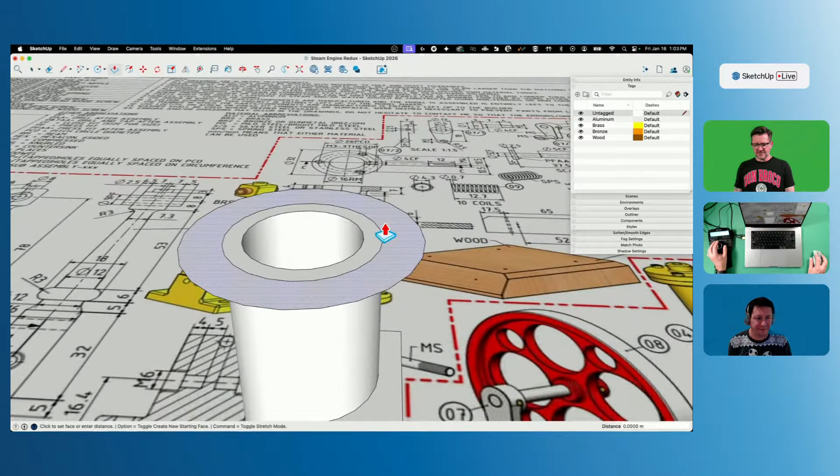All right, so we go this way. Half of 32, of course, is 16. And then that is 4 thick. So I'm going to bring this up 4. Bring this up 4. Really? Yeah, I guess so. I get rid of this inside circle. All right, so that is most of it.

Now we got a couple of holes. I got a through hole here at 7 up. I'm assuming that's centered. Yep. And it is 3.5, so I'm going to pull this from here to here. 7. Circle, inference the middle. Come up to that edge. Half of 3.5 is 1.75. I'm going to push that all the way through like I did before. There's no need to use solid tools here because I can just grab this face, and then intersect with selection. Then I can delete that, and I got a hole through. So that's pretty quick, pretty easy.

Now, you know what I'm going to do? I'm going to try this. I'm going to grab this, make it one shade darker. It's going to darken my thing I'm drawing with, but let's see if it makes these easier to see at all.

Transom says, here in northwestern United States, we have Burgerville. Good burgers and shakes, but more expensive than In-N-Out. We have In-N-Out too, but it's complete with long lines. Yeah, and I think that was the thing that kind of surprised me, the prices. For fast food in 2026, the prices weren't terrible. When you look at the lines, you'd think you're going to pay like $40 for 2 burgers, but it wasn't really that bad. It's like $10 to $13 for a meal, which I thought was impressive.

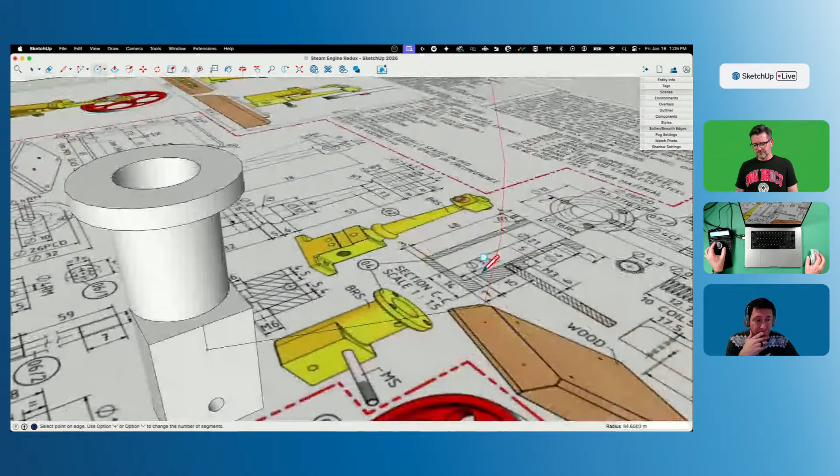It doesn't help that we have like a couple second duration between our live right now and what you're seeing on YouTube or LinkedIn or whatever. So when we ask a question, we're like, okay, how long is it going to take to get an answer? I do want to reference Dave on Facebook was commenting on the earlier question about missing dimensions or having to infer dimensions off of other dimensions. He said, yeah, that seems like a teaching thing, which I agree. I have made multiple plans for the purpose of teaching software and drafting, and I have always screwed with the dimensions just to catch who's paying attention, who's doing stuff right.

2.5. 2.5, yep. All right, beauty. And that hole goes, whoops, all that work for nothing. And that hole goes in 5. So I'm going to grab that.

One thing I wanted to talk about too was you guys probably noticed that my plan is laying on the ground inside the model. If I was just modeling this myself, I would take these plans and put them on a second monitor, or print them or something. I wouldn't normally model inside on top like this. We're doing this so you can see everything I'm doing. But normally this would not be the way to go.

All right, so this is, I'm going to triple click that, make it a group. I still have some holes to put up here, but first I'm going to get this shaft in here, which I'm a little confused by. Oh, it's knurled down here. Okay, so this is actually like a control.

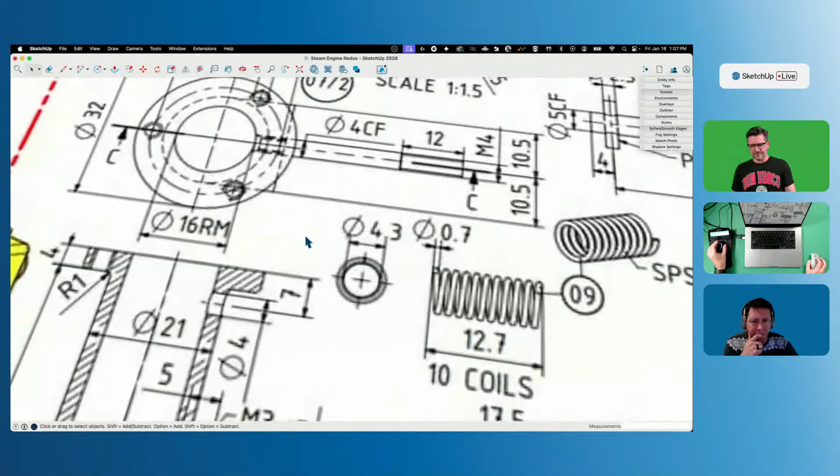Knurled? Knurled. I've seen some cool knurling models, and I've actually modeled some knurling before. Knurled is when you take a piece of metal and roll a pattern into it, so you have something to grab onto. A lot of times it's diamond patterns you see in there.

I'm looking for my overall length, but I can't really find that. I don't know how long this is. 12 of it is this, the outside is 4. Here's where the center line is. I don't actually have a good length, unless this is a separate piece I'm missing. Looks like it's about 34, but I don't know that it matters that much since it's just a hand control.

So I'm just going to go like this, pull it out to here, draw a new circle on top of that out to 4. I'm going to go to 2, and take that and do 34, and we'll take a look and see how that looks.

Yeah, that looks right. Johnny says he would create a scene showing the plan so he could reference each detail more easily. That's not a bad way to do it. I guess I like flying around more than jumping back and forth.

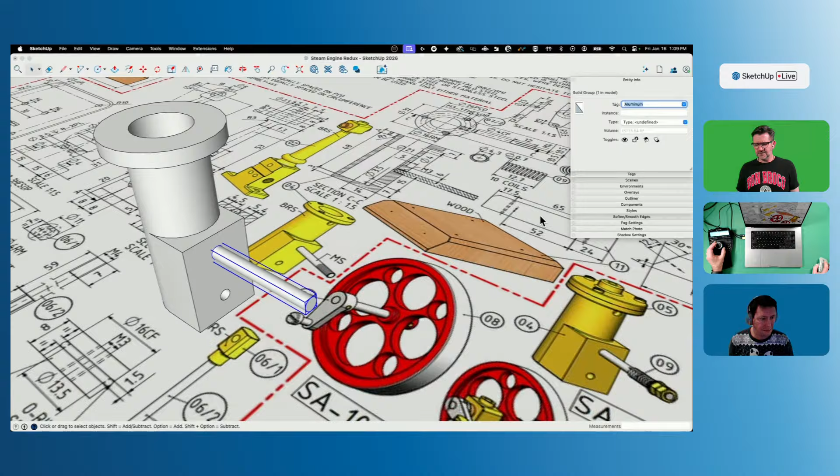I'm going to take this little piece right here. These are 2 separate groups. I'm going to grab that and tag it to aluminum/steel. Then this I'll go back into. Actually, now I can explode this back out.

The only thing I've got to do on here now is these 3 circles. They gave me a center of an inferred circle of 26, so that's 13 from the middle out. So I'm going to inference off the middle, draw a line 13, do one circle right here. How big are the circles? M3, right? 2.5. So I'm going to go this way, 1.25.

And then I'll just get rid of this. Whoops, gosh, I'm just delete happy. I'm going to grab that, and from this center point, option copy it around to 120, say 2x, and that'll give me my 3 circles.

At this point I can't draw a guide that will work this. I can't do a circular guide, so guides are all straight lines. So the easier way is just to infer around the outside.

So then I can take this one, cut that all the way through. Beauty, it's clear. There we go. All right, so that is... oh no, one more hole.

7 down from the top. So if I go from here and drop straight down 7, and then take that back till it hits the face, that's where my circle has to go.

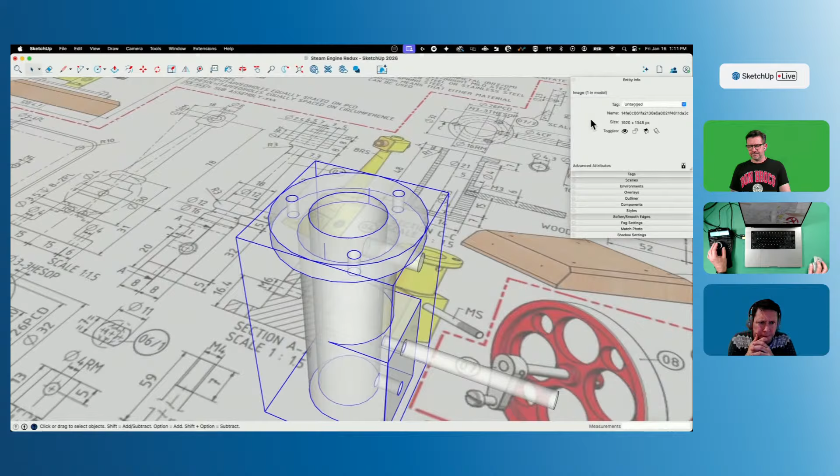How do you know it's not solid just by clicking on it? When you pick it, it comes up here and says group rather than solid group. Looking in here, I'm guessing it has to do with these 2 edges that are floating around. So get rid of that and that, click outside, reselect it. Now it's a solid group.

Now I can take that, tools, solid tools, subtract from here, and that's our piece done. All right, I'm going to explode that one more time, grab that plus this, make it a new group, and put it on brass. Because this was tagged separately, it stays as metal.

All right, that has a whole lot of other pieces to connect with, so I'm just going to slide that over here for right now. The next... oh wait, I didn't name it. Make it a component, not a group, man. Yeah.

So you're an hour and 15 minutes in right now. Some of these are, all right, I will talk less now, but some of these are pretty easy. I'm not going to model the faceplate, so I've got tons of time savings coming up.

Cylinder. You know, there's certain words you type and they always seem like they're wrong. Cylinder's one of those for me. All right, do a circle.

Let's talk. For me, it's February 16. February? Yeah, it's wrong. It shouldn't be. Because I always want to say February. 26.

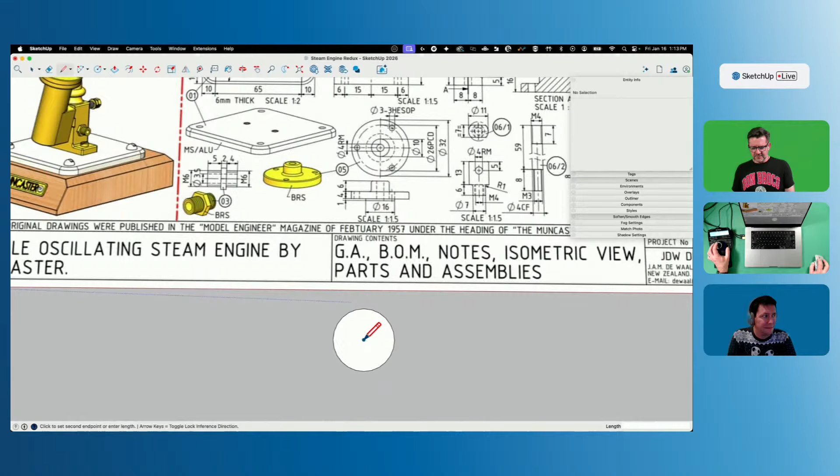Wait a minute, try that again. 16. And then here, 13 out from the middle. So I come to the middle again, 13. This is matching up holes. So I'm going to put a circle right here, 2.

And again, I can get rid of this. I can take this, rotate it from that center point. 120, 2x, whoa, undo. Rotate from that center point. 120, 2x, and then again, get rid of that.

And then what else I got? I got one more hole in the middle, also 4. Come in here, 2, delete that. Those look a lot closer to the edge than that. Maybe not.

Just double check my dimensions. That's 13 in. There's a 4 hole. All right, that is 4 deep. So I'll take that up to 4.

And then here we got another nipple type thing at 10. So I'm going to come in here with a circle. 5. And then that comes up above 6. So then I will.

What is that measuring? I don't know. And that is 05. Whoops. It's actually not 05, it's 05 dash.

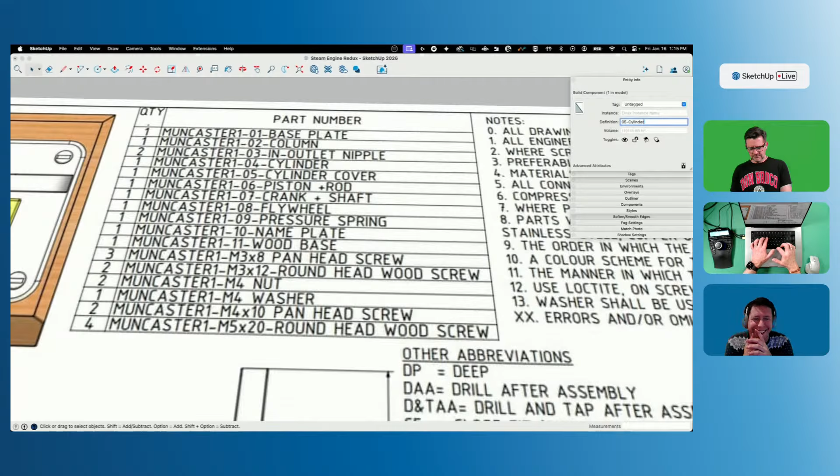Does it have like a cylinder cover? Ramp? I know that's not the word. Oh, is it rounded? Yeah, we definitely have some stuff going on there. Well, because I was trying to see what would that measurement be. Is it the bottom of the rounding, right? No.

Oh, edge, I know I did wrong. I'm sorry, I meant something else. But yeah, I put 4 hole here, and these are supposed to be 3. So that's why these look weird. Sorry, let me. Yes, it does look like it has a bevel on some pieces.

Here, I'm going to do this. I'm going to find the center of this hole real quick. Draw a line up, and then delete it. That way I can come right back in here and fill it. Say that's the name. 1.5.

Grab that from the center. Option 120. 2x. All right, we'll pull that down to the bottom. Double click, double click. And now that there, see that was pretty quick.

That made up for some time. Yeah, there you go. So that's all I got to do. Phone it in on the screws, that's going to help a lot. All right, see if we can line this up with the other screw hole on this other piece.

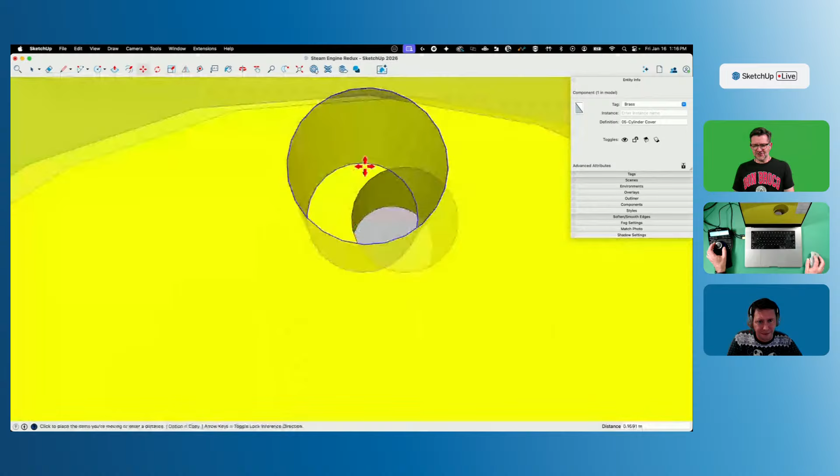Ooh, Keggy says save, okay. Let me just do one last thing before I hit save. Fate, consider yourself tempted. Why aren't these the same size? Yeah, they're pretty close. All right, save.

Okay, maybe it's like you said, one's, you know, oh this is slot threaded on this end, the other thread. Let's see. Right? Maybe, right? I don't know.

Oh yeah, see these are M3. That's exactly what it is. And then these ones were called out as 3. So yes, yes, exactly, okay. Preset, okay, yes, I did do it perfect. Thanks for asking.

All right, now we're on 6. Let's do 6. All right, 6 is a component made up of components. So we have this bronze piston, I guess, with what I'm assuming is like a rubber O-ring right here. Got a steel shaft and then a brass connection on the end. So we're going to just model all those pieces. After that, that's 6. We have a couple more pieces, the flywheel, a little crank thing, and we're going to be assembling. So this should go pretty quick.

I want to save. All right, let's start with the little end piece here. Oh yep, there, rubber O-ring. All right, so I'm going to come in here. Outside dimension is 16, so I'll do that. 8. Inside hole is an M3, so I happen to know that that is 2.5, so I'll put a 1.25 radius hole in the center.

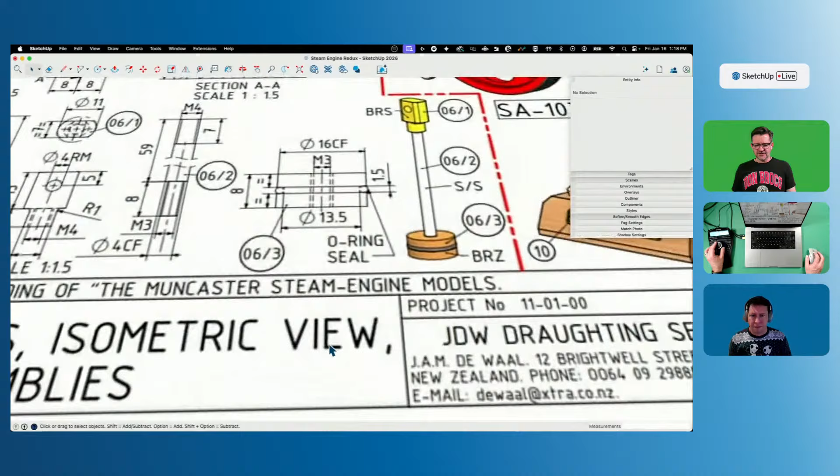All right, we come up equal amounts on either side of a 1.5 tall hole or recess in the middle here. So how to do that? That's the question. We could do math - I could say, what's 8 minus 1.5 and divide it in half? But math, as you all know, is for suckers.

So what I'm going to do instead is use SketchUp and draw a line 8 up. Then I'm going to go find the center right here, inference that. I'm not going to use any numbers that I don't know - only numbers off of here. 1.5, so I'm going to draw a vertical line now, 1.5. I'll take that vertical line by the middlest point, not just a middle point, but the middlest one. There we go. And now I know that this is the width of my O-ring.

So to make a square, even-sided hole, I would come in here, 1.5, like that. So what that means is I go grab this piece, bring it up to here. Then I'm going to offset 1.5, push that piece up to here, grab this, copy it up to here. Wow. Paste that up to here. No mathing. No numbers that weren't specifically supplied to me. There we go.

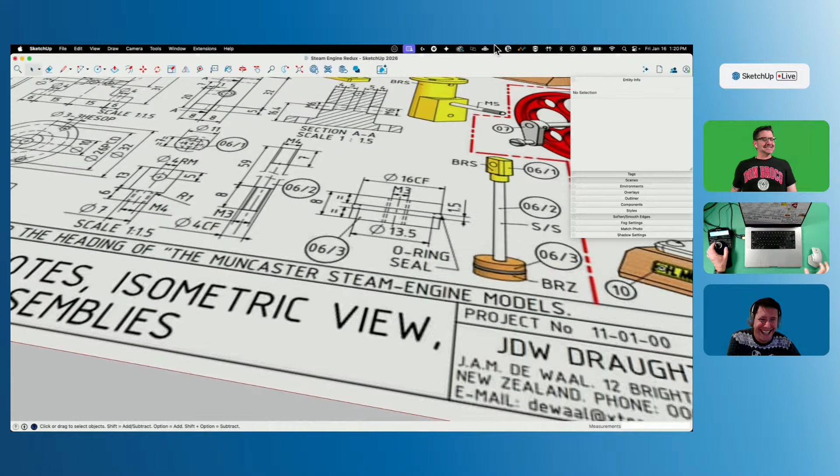So Brad says adding snaps to the components that connect together would be handy. It would be, and I am so rusty on snaps that we would spend the rest of this live stream with Aaron asking the chat how to put snaps in. And that's on me, I'm going to own it. I need to get in and use some more snaps because it's one of those things where I'm like, oh, that's so cool - I don't have time to get into it, but wish I did.

So Transom says, looks like these were published in a magazine in 1957, 67 years ago, not modeled in SketchUp - looks like it was drawn in ink and probably used a Leroy lettering set. Wait a minute, you're telling me these renderings, the originals were? Yeah, I believe that, because I'm looking at this like, why would you go through and draw your bevel with faces meeting? Dave says Mr. de Waal drew these plans electronically, basing them on old drawings from 1957. The drawing Aaron is working on was initially published in March of 2016. That's awesome, super cool.

All right, so what I'm going to do is take this piece, make it a group. I'm going to temporarily go into this group and edit, paste in place. I'm going to use this as my path and say follow me with this circle, but I can't since it's still in a group, so I have to right click, edit groups, and then follow me. Now I can take this X to cut it back out. Come out here, edit, paste in place - and I need a new material because I didn't have rubber in here.

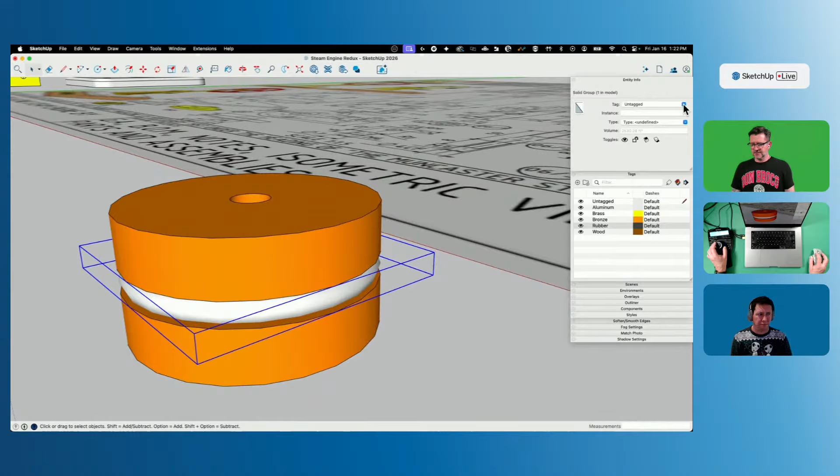So let's go to tags, one new. And for our O-ring, we will make that a nice dark gray. All right, so now this is bronze. This I shall place on the rubber. We got that. All right, let's keep moving.

The shaft here - which please don't take offense to this - but all my aluminum, mild steel, and stainless steel, I'm just coloring it all in a silver color. So what we'll do here is this starts with a threaded section of what is overall here?

Okay, overall, so here's what I'm going to do. I'm going to model this in place on this thing. I'm going to come in with a circle - oops, jump back up to 24. I did only 8 sides on my O-ring because you're not going to be able to see it much more than that, so I didn't feel like I needed to sacrifice a whole bunch of detail there.

So that does the threaded piece of the shaft right there. Now it's going to jump out to an outside diameter of 4, then go up 59, and come back with 7 of threaded. So I'm going to go C - why is there a break in the middle of that? It just didn't want to show the whole thing drawn to scale, so let me just save time and energy. That's going to go up 59, and then this is going to come back 7. And then what I can do is go, hey buddy, come on up here.

And pull that up another 7. And then that shaft is done. Grab that, make it a group.

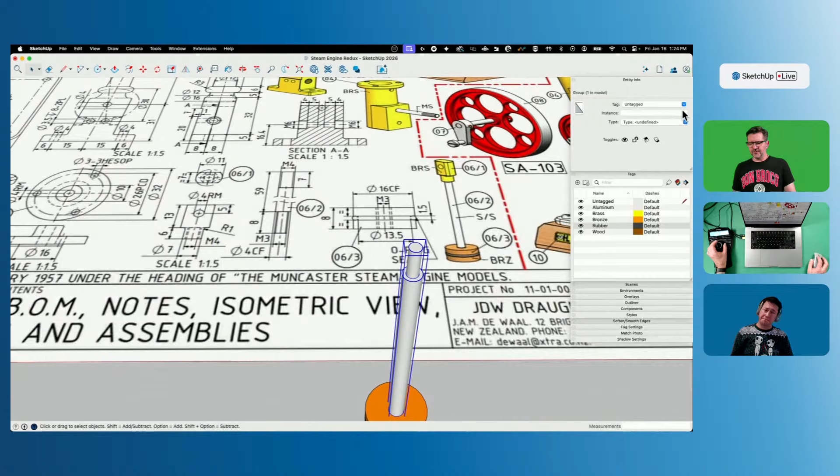I could make these as components underneath components, but I'm not going to reuse them, I'm not going to edit them. So I am cutting a little bit of a corner here. I apologize.

What? We couldn't think any less of you than we already do. You're taking the words out of my mouth, Aaron. That was rude, guys.

All right, we'll start here. We're going to make this brass piece right here. I'm going to start on the outs. Okay, so we'll do the top piece first. I'm going to start with a circle of 11, so that's 5.5 radius, and then that is cut down to 7.

So if I can find the middle, draw a line across there, then I can pull a guide. How well can I see this up here? 3.5.

I don't like that, I don't like that guide colors inference, the current layer color when you do color by layer or tag. Dang, dollar in the layer jar.

All right, so that's this top piece, and that's 13 tall.

You know, I think that was the first video that I worked on when I first started working at SketchUp, was the layers and tags video. That was tough. SketchUp has layers, SketchUp has tags. Not easy. Yeah.

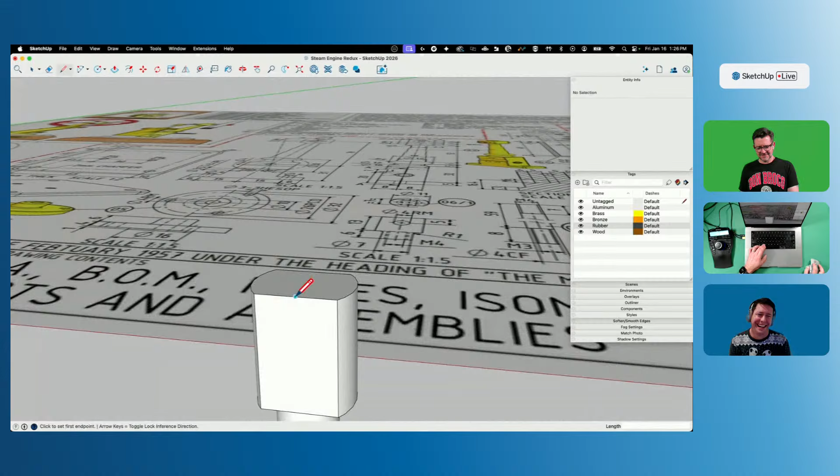Transom says, 'Uh-oh, there you go with the guides again. Picking my jaw off the floor.'

Well, I want to use them more, but I can't see them. So maybe I need to work on a totally black background or something like that.

I don't know. We'll make that brass. Oops, nope, brass, there we go. All right, and I will move that from right here. We'll put that right. Well, that was not right. That was incorrect.

Sweet. Wait, is that 6? Yes. All right, so then I'll grab all of that, make it the component for 06, which is called, of course, the piston and rod. And that, unless I'm horribly mistaken, should be grabbed and stuck inside this here piston.

Just turn on X-ray for that. Oh yeah, look at that. I love when stuff lines up. Didn't you have to— oh, nope, something didn't line up.

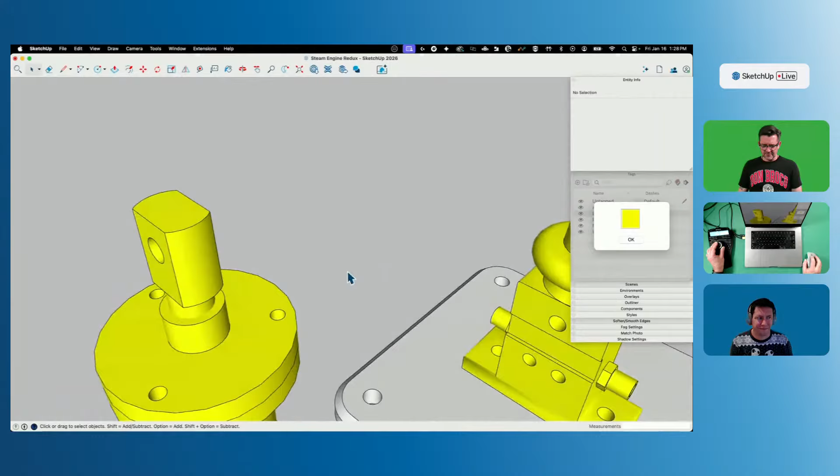All right, there we go. We're moving. All right, so we're moving. More stuff's going to happen, but one thing I know is I'm going to turn this way, I believe. Grab all of this, it's going to rotate this way, I believe. This piece, oh, actually all of this is going to like that.

All right, it's coming together. What's next?

Flywheel. Did you make it into a component? I do believe not this, all this. No, I should make this into a group. So this part I'm going to make into a group because I want to, when I move this, it's going to rotate around this point. So I'm going to be rotating like this. By grouping the pieces in there together, that's going to keep them all in the same spot. It's not going to move the piston automatically, but we take what we can get here.

All right, let's get this flywheel on. Man, that wheel flies. All right, I'm going to start with a circle of 80. So I'll start with 40.

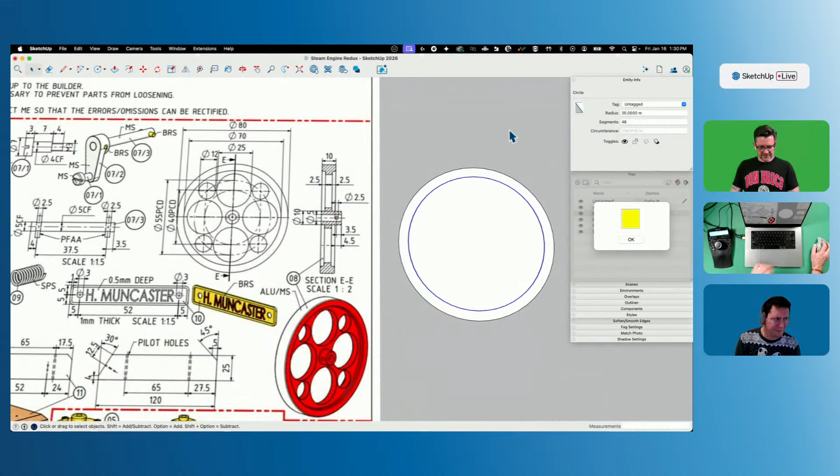Words? Yeah. With stuff?

Gusbert says, isn't the guide color in the style you're using? I was wondering about that, and I did not go check it. Let's take a look right now. Let me get these two circles in here. This one's just 2.5, that's the piece that goes around the shaft. We'll go there, and then let's check, shall we?

Let's go to styles, and there'd be extra stuff. Guides are set to black. Let me pull another guide. Yeah, normally they'd be drawn as black, but what's happening is, I have tags set to color by layer or color by tag. Ooh, color by tag, I haven't said that in years. Because color by tag is turned on, every time I draw a guide, it's referencing what tag it's on, so it's drawing it as this light color. Maybe we could just make the default color a little darker gray. We'll see how that works.

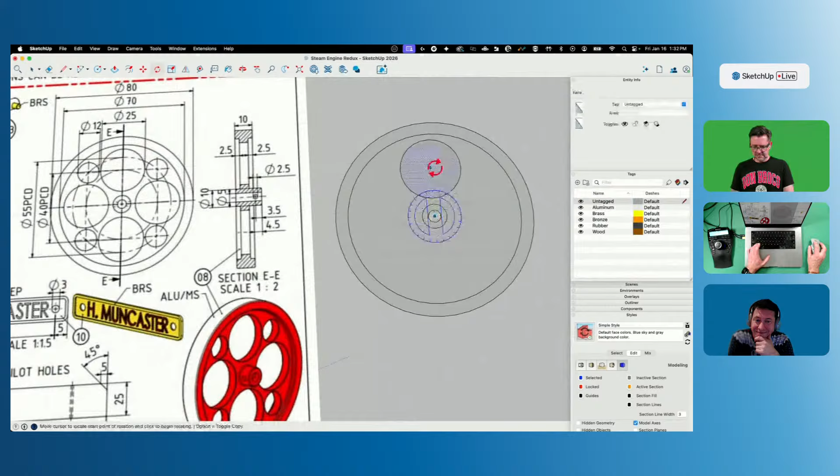There's 90 degrees. Is this piece meant to put a belt on or something like that? In theory, with these model ones, it's just to show the motion, that's really all it is. If this were a real functional steam engine, this would be the part that creates motion and drives something else.

All right, so now I have another one. Let's see, to do this I'm going to grab all of this and rotate it 45 degrees. I'm going to go from this point straight up to... here it is, 55. So 25, 27.5. And then that's a circle, the width of 12, so circle 6. Get rid of edges, edges, edges, edges. Rotate that from the middle.

3x, get rid of the material on the inside. I'm assuming this is partially for looks, partially just to make this lighter as it spins. All right, so now I want to do this. Assuming that this face right here is here, that means this is going to come down 2.5, so I'll drag that down 2.5. This middle piece will come down 2.5, so I'll take that down.

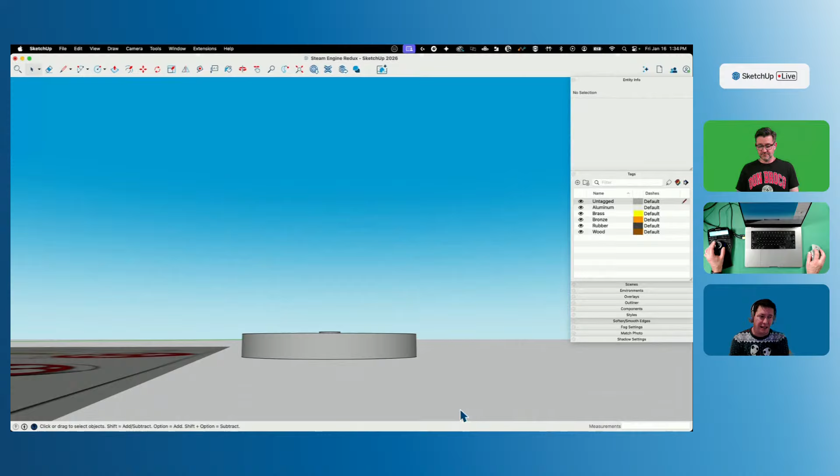Dave says, for what it's worth, when I modeled this engine, I started with the wooden base and modeled everything in place above it, so there's no need to move anything into position. Quested said, it's nice to have so many armchair coaches here online. I thought Dave was reminding everybody that he's just a little better than me. He followed up by saying the flywheel is actually to provide the inertia required to keep the engine running between intake and exhaust. This engine doesn't have a pulley or a belt.

Oh no, all right, so I did a thing. It's not a good thing. With most of these faces, I pulled up copies, so I probably have some internal faces I need to clean up, but I didn't do that on this one, so I left this behind. To close this face up, because it's so perforated, I'd have to connect every hole to another hole to get all the pieces in there. I don't want to do that. Instead, I'm going to grab this face, option copy it straight up, and reverse it because now I know it's upside down. There we go, that's a little quicker and easier.

So like I said, I know I have some extra faces in here. When I triple click and make it into a component, what number were we on? Oh, 8. 8 already, we're flying. Wheel. By we, I mean you. I'm just watching. Hey, this is a group effort, we're all here so we all count. I'm going to run Solid Inspector in here and get rid of those internal faces. There we go, and then we can also assign that to our aluminum, steel, or whatever.

Dave said, I'm not better than Aaron. When I modeled it, I didn't have to show others the plan I was working from. Okay, I'll take that. I think I did something wrong here though, 4.5, I went to 3.5, so that should come out 1 more millimeter. All right, so we'll take that.

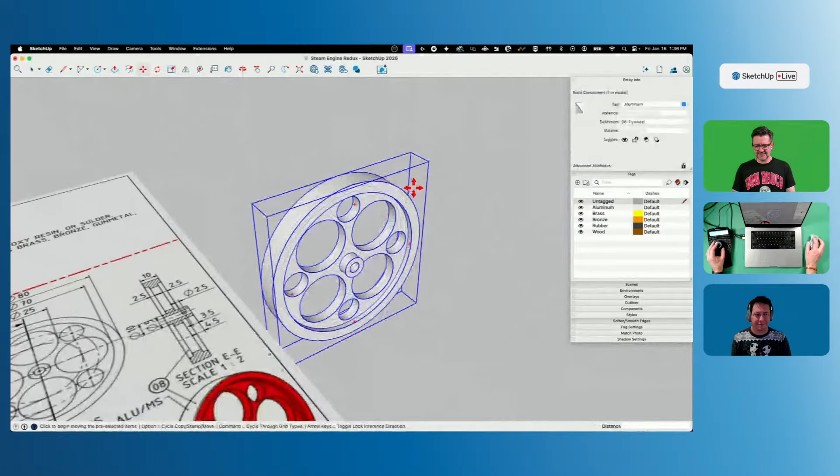Oh, actually, it needs to go around. Where does this sit on? On this. Questis says it's known as a hit and miss engine, hence the need for the mass of the flywheel.

Cool. All right, that goes right there. We're almost there. We're almost to the end.

Couple more pieces. I did just want to touch on, yes, modeling all of this in place would be a great way to do it, especially if you had all these pieces really well defined. Assembly drawings are really good. Unfortunately, some of these assembly drawings leave a little bit of interpretation to be done, so guesswork. It's a little more work than it would have to be, I guess. I don't know, but that's cool. I think doing it in place would be a cool challenge to do.

Bike Hiking Camp says, Aaron knows how to fix every problem he encounters. Quick and easy, impressive. It's because I make them a lot. I know. And then Kagi says, well, he practices correcting mistakes quite a bit. There you go, Kagi's been around, knows what's going on.

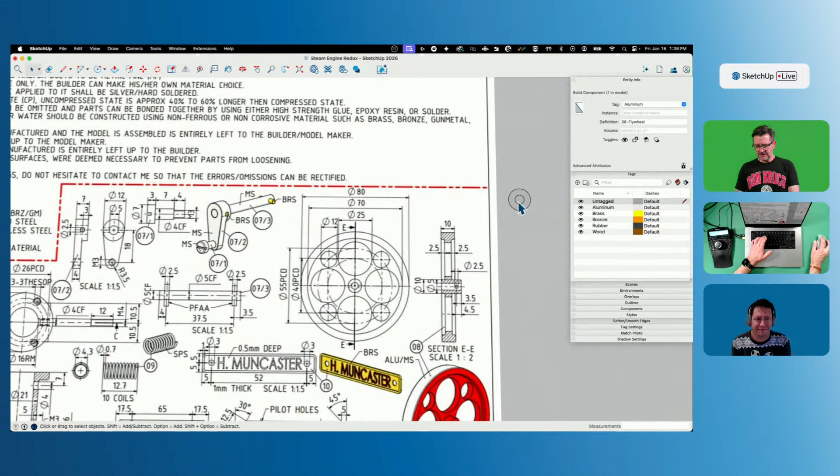All right, I'm going to start this section with this bar right here. So it starts off with a circle that is 12, so I'm going to go 6. It's got a hole in the middle, it's 5, so I'm going to draw another circle, 2.5, and then delete that. Now, that piece goes through 3 before it expands to this. So what I'm going to do is I'm going to take that and push it down 3, and then up at the 0 at the top of it, I'm going to model the rest of this.

So from the center we go down 18, so I'm going to come up here to this top piece, go down 18. Put another circle down there, which is 3.5, 1.75. Get rid of these, and then we have a 3.5 circle around that. Oh wait, no, that's an M3, excuse me, that should be 2.5. Good, you're catching it now.

Nope, drew it wrong, and draw it, 1.25. Third try's a charm, as they say. All right, then I have a circle that right here is 3.5. Now this then ties in to this.

When it comes to making tangent pieces, I cheat a little bit. I don't, because the way SketchUp circles work, tangent isn't automatic, because SketchUp represents circles as a bunch of straight lines connected together, whereas tangent is where curves coincide. There are extensions out there to help you find tangent of an actual inscribed circle inside of a SketchUp circle polygon. I just kind of come close.

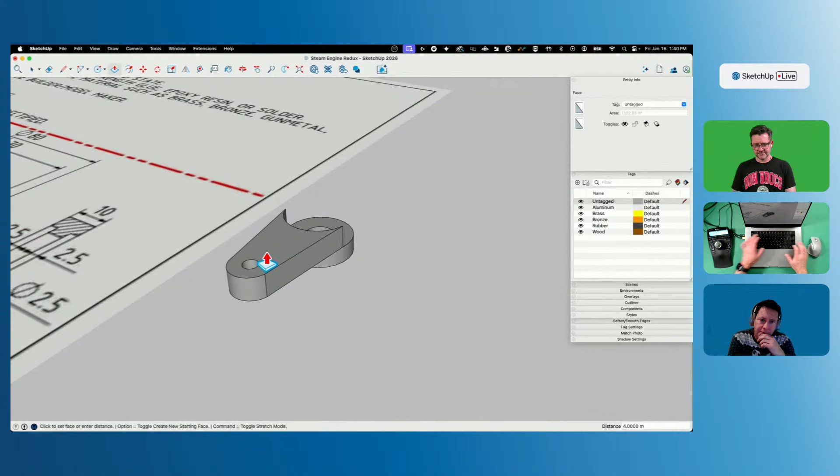So this angle might not be perfect to what this tangent line is to these two circles, just telling you. But I'm going to take that now and bring it up 4. Smooth, smooth, smooth, smooth, save. Doing it all.

All right, now we need a this. Then we'll make a this. Yeah, that's it, we're like on the tail end right now. All right, yeah, so here's how I'm going to model this. Let's model it in place. Dave. No, I'm just kidding.

Studio RT Cool says there is a TIG extension for tangents. Yes, that's the one I was thinking of. Knowing TIG, it's probably called something like TIG tangent, but yes, that is a good one. TIG tangent, yeah. So I'm going to grab this, make it a group, and I'm going to come in here, come right here, like that.

Here's the first part, there's the first 4 millimeters of that screw. Then it extends out to 4, or expands out to 4, so come here with another circle, 2. That is going to then go up 7, 7. And then that is going to now go to 7 wide, so I'm going to come here with another circle, 3.5. And then that is going to get a height of 3, so that's going to go up 3. And then?

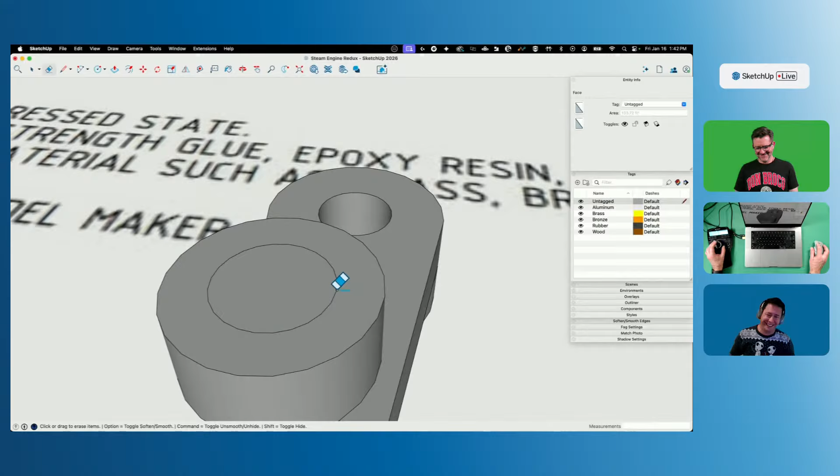And then one last thing we're going to do is put a screw slot in there. So I'm going to go from about here to about here. And this is, how tall is this? This is 3. So I'm going to go down like 1.25, something like that. All right.

Questa said this kind of drawing exercise showed up quite often in my mechanical engineering course classes. First task was to determine all of the missing dimensions and then render a new drawing from them. That sounds like my time doing production design of residential houses.

I'm going to cut some corners here. I'm going to make a circle right here. I'm going to bring that down 45. Triple click, make that group. I'm going to grab all of this, make it into the component. And that was number 7, I believe. I skipped over crank plus shaft.

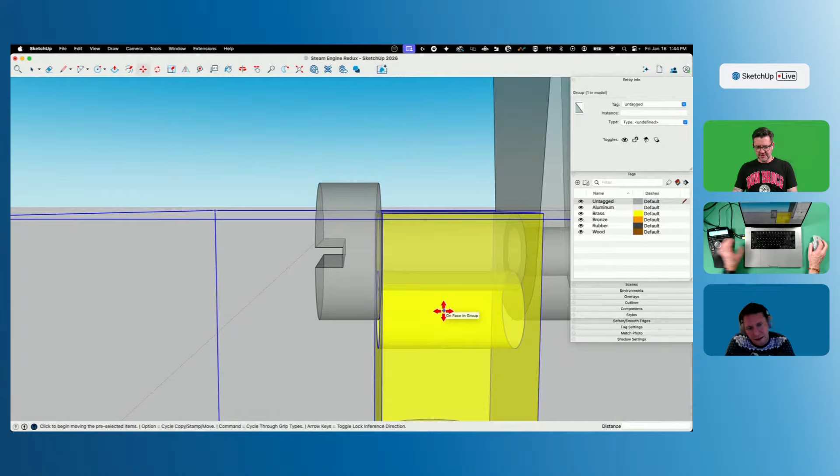All right, let's take that, spin it up. And where does that go? Oh, that goes, I'll tell you, thank you for asking me. It's going to go right here. And then this is going to slide through to where it hits here. And then this piece will rise up. Let's try an X-ray. This is going to rise up until it hits right there. Look at that. All right.

What else we got here? Spring wood plate. Let's do this wood plate real quick. The wood plate is 120 by... math, man, all right. 17.5 plus 65 plus 17.5 is 100, of course.

Go there, and then we will go up 25. And on the back we have 5. So I'm going to grab this edge, oops, get rid of these. Move, copy that in 5. Move this piece down 5. Get that 45 on the back end.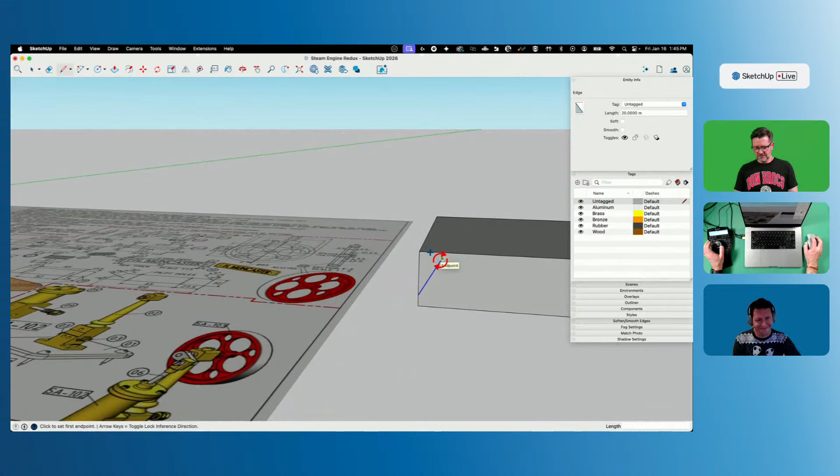On the front it's 30 degrees. So here's what we're going to do. I'm going to come up here, up 4. Then I'll take this and rotate a copy of this to, what did I say, 40? 30, 30 degrees. Continue that edge out a little bit further. Whoops. There we go.

Transom says hey, it's like old times, I'm watching on YouTube and LinkedIn, double the views, double the views. Questis says how good to have 2 screens for the same live stream. Really take advantage of those multiple monitors that I don't get to use. Yeah.

And what was this? This is 11. And then, of course, I'll put that on the wood level. Wood level? That's that, I'm just making stuff up now. All right, so this turns this way. I didn't put the screw holes in here, but I think I'll be okay with that. Almost looks like a thing, Aaron. We're getting close.

That was kind of cool. All right, so what in theory... so there's a couple more things I could... wait, huh? Oh, dang it. I moved this up, all right.

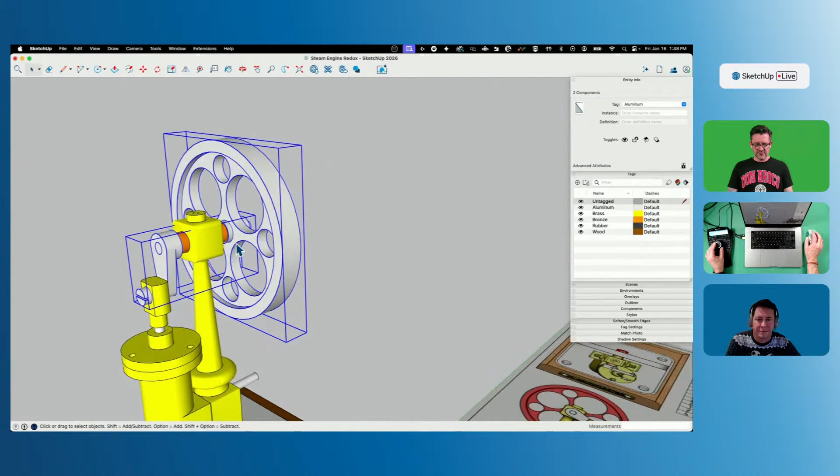I'll make this into a group. I'm gonna grab this and this, make it into a group. And then, so if I take this, excuse me, hold on.

I'd like to say I'm getting a cold or something, but it's like 65 degrees. This is probably allergies or something in January. Yeah, I know that, that spring pollen.

It's killing me, man. All right, I'm going to take that, and at its most, like I said, this is going to go at 90 degrees, which should, in theory, match this at 15 degrees. That's what that drawing was showing, I think. So if I go find the center here, grab it here, and I rotate it 15.

Ooh, that's pretty close. Now I grab this one, and I need to move it in line with the center of the piston. The easiest way I've found to do that is we'll go to View, turn on Hidden Geometry, and any of these lines that go in a straight line, I can inference. So I'm just going to go on this one right here and just start sliding it up like this. Not quite, okay, so it didn't quite get there.

But what I can do from there is I can take both of these pieces. I don't like the way that looks with all the stuff on there. We're gonna rotate it, we're gonna use the middle of this piece, this is where the point is, to the middle of this circle. So inference right there. Oh, I need to get around the other side or something.

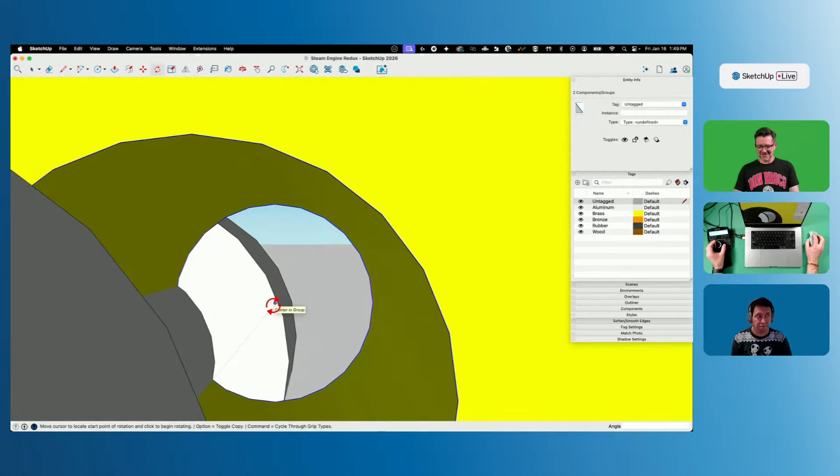It's on the inside of this, so I came so close. We'll rotate that around till we can inference maybe that circle right there. Is that it? That looks like it could be it. All right, now I'm going to move this one again vertically. Can I move that? I got to constrain it again, so let's go view hidden geometry. We'll slide it down this way. Whoops, nope, that's because that's on the geometry, that's why I can't use that one.

So we'll start going this way, come down a little bit, shift, and then... I'm not quite sure, I'm trying to think how the easiest way to line this up is going to be. I don't know, was it 15 or 16 degrees? So it's slightly less than 15 right now. Oh, there's a lucky guess. Take a step back, it'll look great. That's right, hold on, zoom out. Watch this, yeah, that's the stuff. You take your glasses off. Yeah, so there we go.

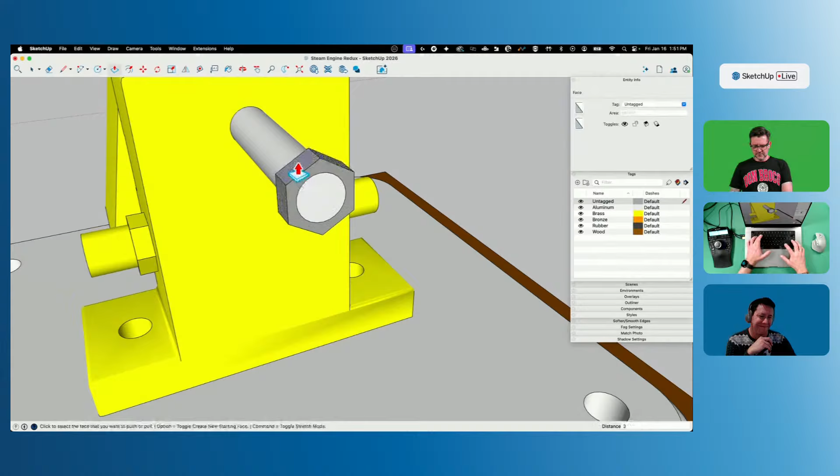That's the bulk of it. We have a couple pieces here. There's a spring that comes out and then some nuts. Here, I'm going to just do this real quick. I'm going to go grab another polygon, go to the center right here, pull this up that much, and then draw a circle on the inside of that up to here. And then I'll push that through 3 millimeters... 2 millimeters, there you go.

I think there's a consensus from the comments that you need to learn how to use the snap feature. I agree, I'm not going to argue with you on that at all. I totally agree, I really wish I knew it better right now.

I'll make both of these brass. For the spring, here's what I'm going to do. What is this? Transom says, how about using a guide? So I'm going to go something like that. This is going to do it super, super quick, spring here. So if you've seen this before, you'll probably recognize this, but I'm going to draw that. I could go get an extension like Draw Whirl or something like that, or download a spring

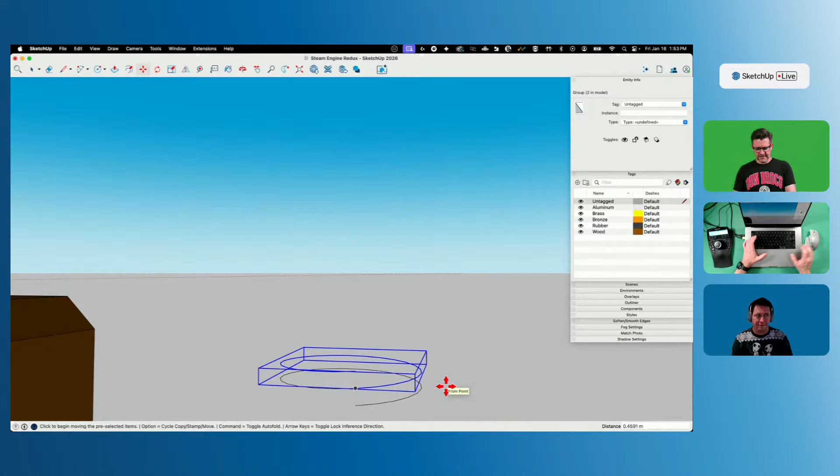from the 3D warehouse, that'd probably be the smartest thing to do. But I've never claimed to be the smartest guy, so why break with what I'm good at? I'm going to option copy that up 23x, and then I'm going to group that, double click this, make it a group, select all of this except for that group, delete it, squish it, and then make that, I don't know, 9 times, 15 times, 15.

All right, yeah, scale it up a little longer. Perfect, now we'll come down here, draw a circle, approximately about that big, and then we'll drop that down. Again, the right amount of detail is super important. I don't need 1,000 sides on that if it's going to be a teeny tiny little spring. Follow me with this, okay, there we go.

This will be steel, or probably not aluminum. I don't think steel is a good material for... Aaron just told us that he has spring allergies. Nailed it, that's what I was choking on. The thought of modeling a spring.

All right, so I'm going to grab that by the middle of the end of this group, align it with the center of this circle, and then slide it back. Oop, it got a little too big. All right, so we'll bring it to here, and then I'll scale it, squish it down with these lock nuts to there. All right, good enough, good enough, it's gonna work for our purposes. There we go, we did it.

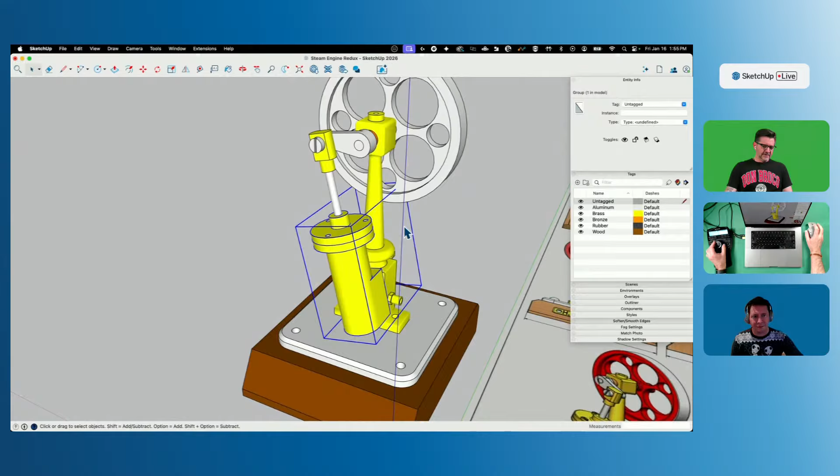I did not get to materials, but we could real quick, super duper quick, put new materials on this. So one of the issues we have with materials is that they scale. If we look at like the metal materials, there's little teeny lines in there representing the grain in the material, that kind of thing. So if we put it on here, it's going to look wrong, so we got to get it to the right scale first. Unfortunately this is not a super quick and easy process, but here's what I'm going to do. I'm going to grab all this, make it into a new group, copy it, and go over to a new model altogether and paste this in.

So I'm going to go ahead and explode that group. These individual pieces though, they know they're scaled, so I can cause issues if I start dropping materials on them. So I'm going to say scale definition, which resets it so this is the proper scale. Now if I come in and grab a wood color, I'm going to see that look like wood grain, right?

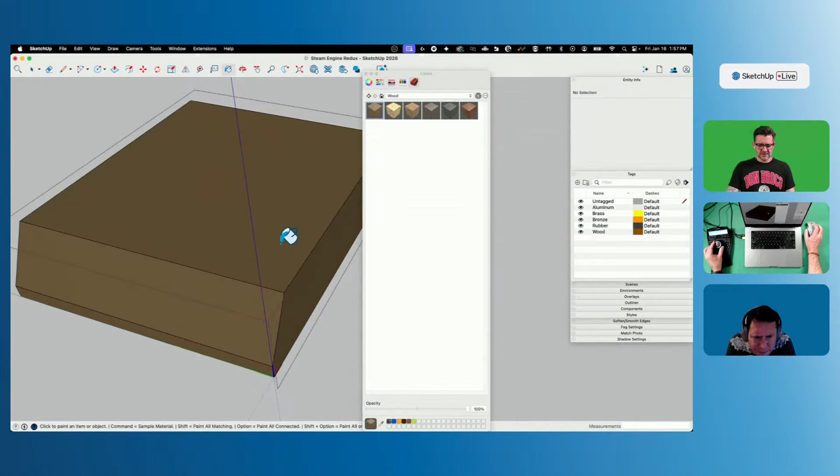I'm doing this in two separate models because I want to show you this. If I was to go back to this one, and let's get rid of color by tag — if I come in here and put that same exact material on here, looks like it's just brown, because if I zoom in here I'll see the grain eventually, if I get way in. Wow, micro grain — that material would be very fine, that would be super smooth.

That is scaling materials, so the easiest way to do that is to get it to the proper scale before you put in your materials. So let me go ahead and we'll reset the scale of all these pieces. And whilst we're at it, let's go to face style, photoreal materials. Awesome, let's go grab an environment — this is inside so we'll grab something like that. Oh, that's going to work nicely.

Okay, I didn't do screws — I figured materials more important than screws. You want to draw screws, you can.

Dave says good job on this, Aaron. And that was preceded by Aaron asking how many engines I've modeled. I went back and counted — looks like 83. Oh man. So I'm going to end this with Dave — Dave sent me an engine to try to model, and I did it. I did not do it in live model time, it was hours and hours, but I'll share that with you after this.

All right, so if I come in here and get rid of — so I have just my brass things, right? So if I come in here and start grabbing these and say scale definition, and then I go grab my metals.

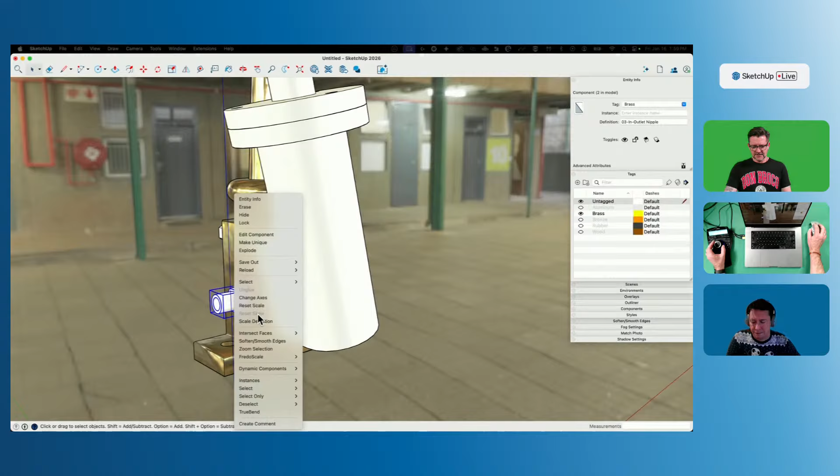Grab my brass. There we go, that looks correcter. All right, so I'm going to grab this same thing, scale definition — I got two of these, scale definition. And I am coloring the outside of the group. I'm okay with that on this because it doesn't have a grain or anything like that. Are these components? They are. Scale definition, scale definition. In the comments, do you guys have a better way to do this? Because I'm not a huge fan of doing this. Is there an extension or something for scale all?

I wonder if it's called like Fredo Scale All. Possibly.

That's some good looking brass, a little tarnish on there, I like it. All right, let's go from brass to aluminium. Same thing, select, scale definition. I'm going to grab my shiny metally materials. Ooh, that's pitted, oh but it looks kind of cool. I think we have a cleaner material here. Well, a little bit. Ah.

Scale definition. This is very interesting looking. This is why—

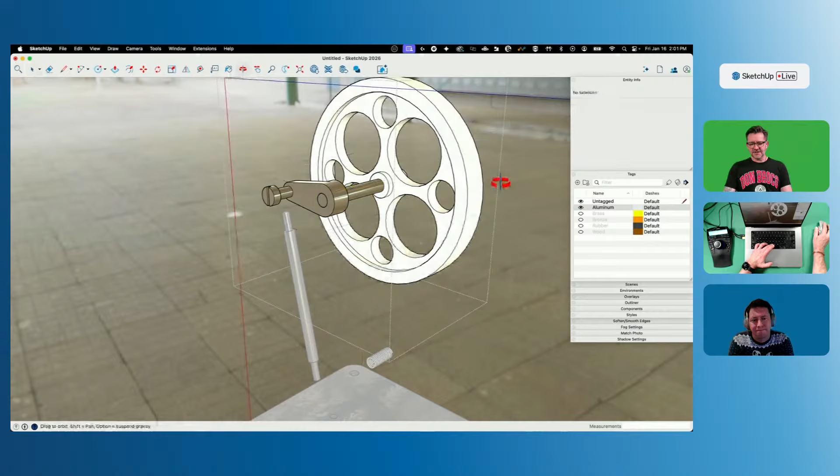Dave says I just enlarged the textures after applying them. Yeah, that would be the other thing. I did that with the bigger engine you sent me, Dave, and I was getting aggravated by it, so I didn't do that.

I think this was just a group, so no issues there. All right, there's aluminum, bronze — we don't have very much bronze. This is it, okay, scale definition. And then I have this — this is really more coppery.

That piece is hidden though, isn't it? That didn't rescale. It is.

Dave says SU4U scale definitions — that must be the name of the extension.

And then Transom says, couldn't you just select all and then scale? Well, the problem you run into is that every component has its own. Why is that? This one's not scaling right, I don't think. Sorry, one second, let's go ahead and explode this out. I'm not sure why it keeps resetting my materials between. All right, I don't know what's going on with this one.

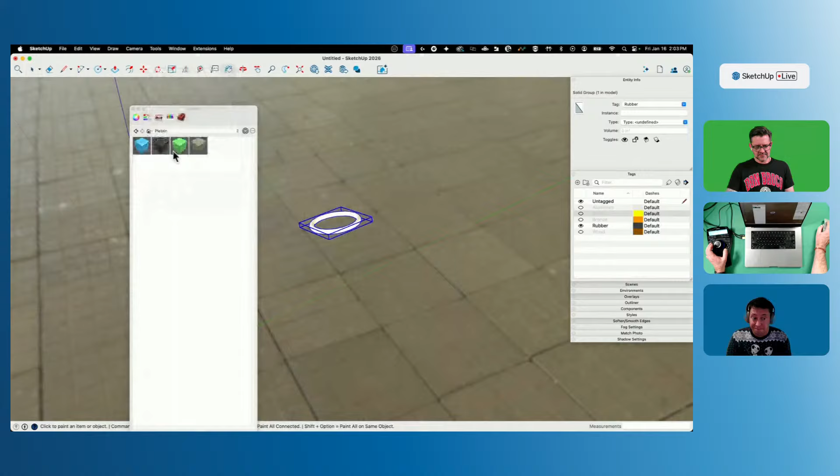Let's go ahead and go to plastic. We have a black plastic in there, yeah, that works. Oh, look how shiny that is. Dave says scale definition is only available if you have a single component selected, so I edit the texture size in the materials panel instead.

Ah, that makes sense. Okay, but look at this. Woo, shiny and beat. This thing looks like it's been through one of those restoration channels on YouTube. Look at those hammer marks. Wow, nice job, buddy.

Okay, I'm just gonna say this - I love this. I have not really enjoyed the use of the sky domes very much. Where are you guys at on this? Because I love the light, I love that I can choose a different environment to get different colored lights in. But the sky dome, maybe it's because I'm not doing building size models so often, but I think what I mostly do with these environments is turn the sky dome off and just use the reflective.

Oh, that looks so good. Yeah. All right. That is pretty cool.

Let's see what that looks like without edges. Let's just see what that. Oh, I don't even have ambient occlusion on. It's because it's 5 after, I've used it all up, you guys. I'm just going to need another coffee. Let me turn on faces, ambient occlusion. Oh.

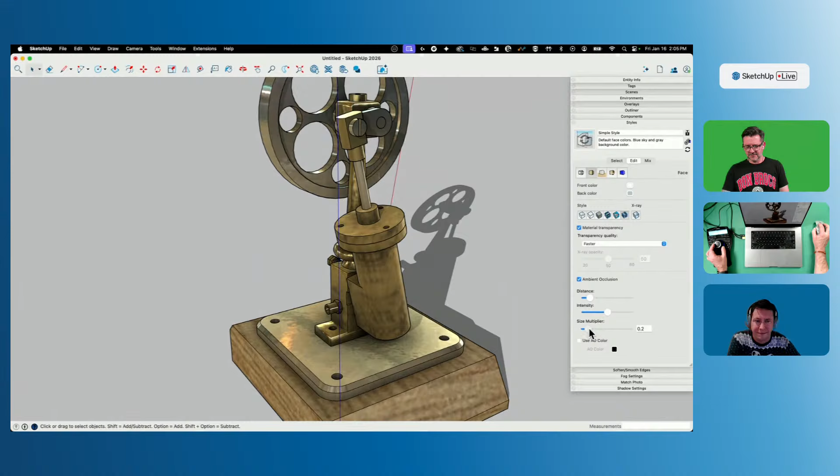Not distance. More. Keggy says, great modeling, Aaron, as usual. Let's bring this back down. Oh yeah. Wow, that is good looking stuff right there. And then, like I said, let's see this without edges. Oh, profiles are back on. That's perfect. And edges. There we go.

Look at that. Not too bad for 2 hours of SketchUp modeling, right? Awesome. Well, hey guys, thanks for hanging out with us and watching me do this again.

I don't know, show of hands - does anybody remember this model from last time I did it? I honestly can't say that I do. I saw that it was up there. I kind of scrubbed through real quick to see if I got to a finished engine of some sort, and I did, and that was all I looked at. Was anybody there? Yeah, I know.

Almost forgot ambient occlusion, I probably should have been modeling with it, really. But all right, everybody saying nice job, Aaron. Nice job, Aaron. Nice job, Aaron. Thanks, folks. Thanks. So yeah, we'll call this right here.

And get that. Got to start thinking about my thumbnail. Sorry, Guspert. You can't blame that on us, though.

That's not our fault. Okay, so yeah, Dave remembers it, Keggy was there, so yeah, I had a couple people who were there and do remember this. But there we go, that's a quick and easy steam engine. I'll throw the image for this as well as a link to this up on the forum.